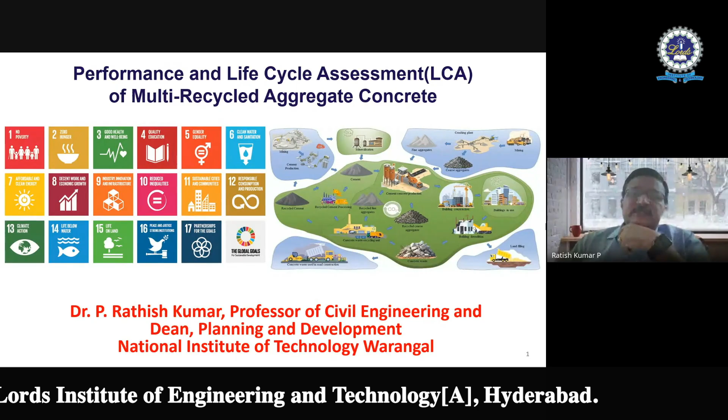And you can see that there are several keywords which I'm trying to mention over there. One is performance, which is very, very important, as everybody knows. When I say performance, obviously, I'm talking about strength as well as durability, right? And then I'm using another keyword, which is life cycle assessment, which is the process which goes into making a product, and the amount of energy which is required is also a part of it. That's like embodied energy. So in this process, what are the different stages which are involved in this life cycle assessment? I'm also going to touch upon that.

And contrary to the point that everybody talks about recycled aggregate concrete, we try to go a little bit in a slightly different way, that we try to go for multi-recycled aggregate concrete. I mean, we thought of exploring the idea of not just single recycled, but is it possible to go for generations of recycling also?

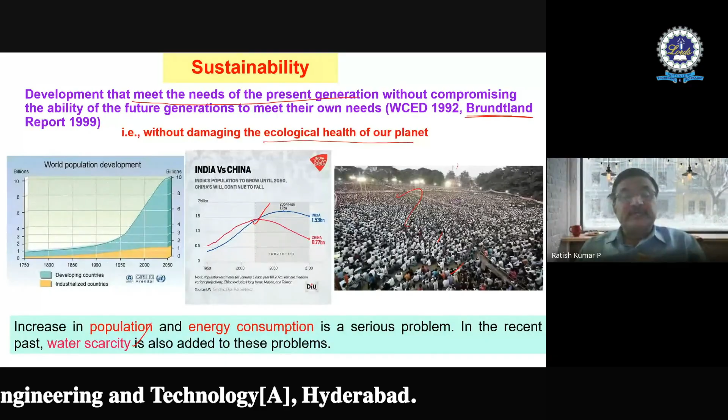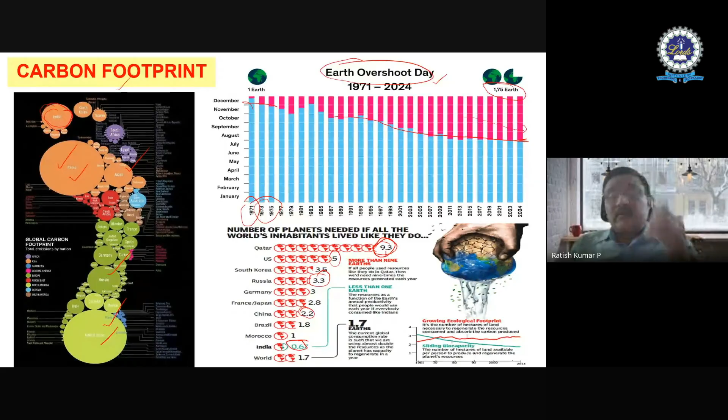But at the same time, we cannot be complacent, because as the population is increasing and we have crossed China now, our demand for infrastructure is increasing, our need for resources is increasing. So that is the reason why we cannot be complacent about saying that we are 0.67 times of Earth. All of this I'm talking in terms of the global ecological footprint.

Now, if you try to understand the energy side, India's projected demand, that's why all of us are talking in terms of sustainability - that is the background we have to really understand. If you try to see India's projected demand by 2047, we are talking in terms of Viksit Bharat. We have a vision for 2047, and all of us in different directions, whether engineers or teachers or working in different areas, we are aiming in that direction.

We are trying to come in tune with the Viksit Bharat concept of India. Now, if you try to see the global energy demand, or India's projected demand by 2047, India's projected demand is close to around 18,125 terawatt hours. I might not be interested much in industry, which is 9,920, but I'm interested more in buildings, which is 2,287 terawatt hours. That is our projected demand by 2047, right?

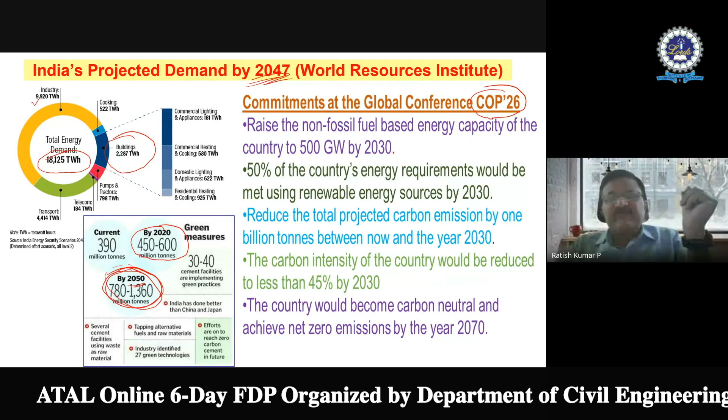Now, our Prime Minister Modi ji has actually made 5 tall promises at COP26, the Conference of Parties, which was conducted in Glasgow, Scotland, where we have made a responsibility on each of us, which we call Panchamrit. So there are 5 promises which we have made to the world that we are going to realize.

One of the important things is, we are actually dependent upon fossil fuels. So we want to raise the non-fossil fuel based energy capacity. That's one very important thing, which I'm also going to cover a little bit in the idea of life cycle assessment - what are the different fossil fuels we are trying to use and can we really reduce them. We want to raise the non-fossil fuel based energy to 500 gigawatts by 2030. That's a tall challenge.

The other thing is we want to basically reduce the country's energy requirements through renewable energy resources - solar energy, hydel power, wind energy, whatever it is. So we want to improve ourselves by 50% by the end of 2030. And then we want to basically reduce the total carbon emission by 1 billion tons, probably between 2024 and 2030. We want to reduce the total projected carbon emissions by 1 billion ton.

When I said carbon emissions are to be decreased, obviously we have to think about reduction in carbon dioxide from cement also, because it is normally said that 1 ton of cement produces around 0.89 or 0.9 tons of CO2. So some people say 1 ton and 1 ton of CO2, but it's around 0.89, 0.9 tons basically. We want to reduce that, and we have to think about ways and means of doing that. The next thing is, the fourth promise we have made is we want to reduce the carbon intensity by 45% by 2030.

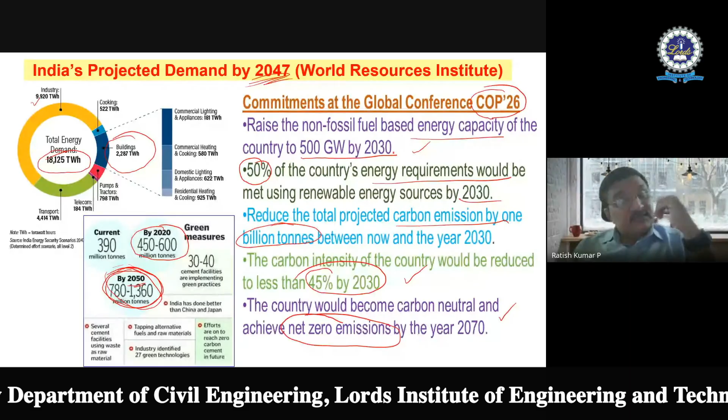That's another challenge, and then finally we are trying to make the fifth promise: that our country is going to become net zero emission by 2070. This we can achieve only when each of your individual campuses or spaces contribute to that. So that's a very important thing. These are the 1, 2, 3, 4, 5 promises which we have made from our country to the world, and obviously that responsibility we have to shoulder. These 5 promises are called Panchamrit, made at COP 26, the Conference of Parties 26 meeting, a global meeting which took place in Glasgow in Scotland. So that's what the challenge is now. All of us are equally responsible to achieve these 5 points. It's not just that the Prime Minister has made a promise and we forget about it - all of us have this responsibility.

Now let me try to slowly enter into the concrete part and then go into the performance part, etc. I will not go too deep because I also will touch upon the multi-recycled aggregate part.

If we try to see, at one point in time when you think about heritage structures, for example, we were part of the Ramappa World Heritage Site project. We did a lot of work collecting material from the Ramappa site where the bricks in the Sanctum Sanctorum area were broken, and the mortar used for connecting the bricks - we tried to collect that mortar. We did a lot of sampling, and we could crack the recipe for this 815-year-old temple, using different types of organic additives and several other things they were using, along with lime, which is a well-established technique.

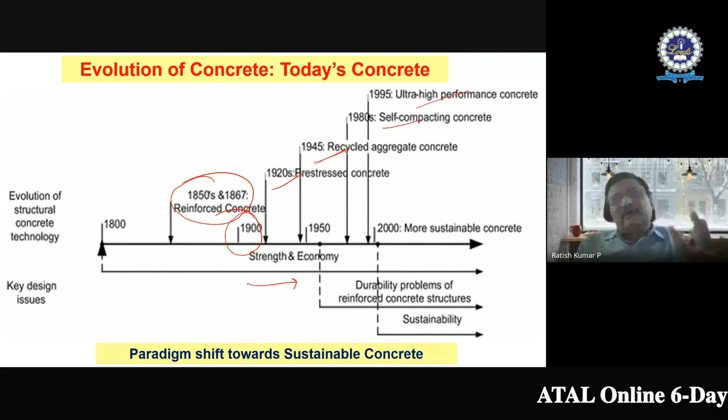If you go down the timeline, you can see that in the 1920s came prestressed concrete, recycled aggregate came in 1945, then self-compacting concrete, ultra high performance concrete. These days we are talking about roller compacted concrete, fibrous concretes - all these developments have started only in recent years.

People started thinking that at one point the concept was that durability is normally achieved through strength. But then we realized it's not the question of achieving durability through strength - it's basically a performance-based design, not a prescriptive type of design. We thought strength is achieved through durability, not durability through strength. And then slowly we have been moving in the direction of sustainability.

We have been thinking about three important points: strength, durability, and then we entered into another domain called sustainability. That's the reason why we are now talking in terms of sustainable transportation, sustainable water resources, sustainability in terms of environment, in terms of technology, in terms of social aspect, in terms of economical aspect. So when you talk in terms of sustainability, there are four important things.

One is called the social aspect, environmental aspect, economical aspect, and the fourth one is technology. In fact, technology was basically looked at in the environmental aspect. Now we try to make it a quadruple bottom line approach instead of a triple bottom line approach. And we have been slowly moving towards sustainability, and that's the reason why all of us, whether it is FDPs or research, have been talking in terms of sustainable concrete, sustainable mortars, etc.

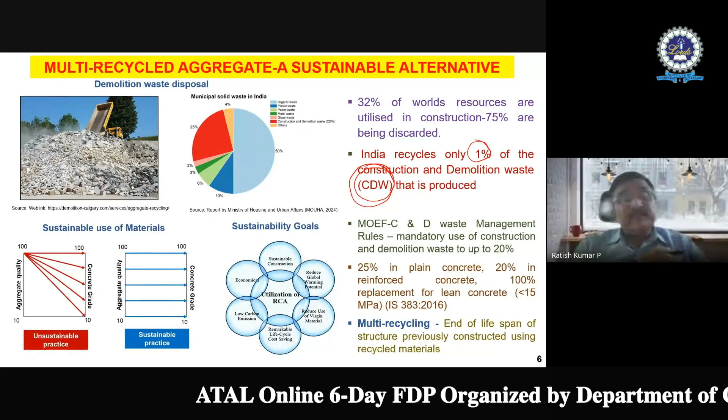And one of the important replacements is construction demolition waste. People have been doing that, but unfortunately there should be a lot of pickup in this direction, because India is recycling only 1% of construction demolition waste. There is the Ministry of Environment and Forest as well as the C&D rules, which very clearly say that we have to mandatorily replace demolition waste up to 20% in any construction. But the problem is only with implementation. At one point of time, we had been working a lot in the direction of fly ash.

And if you try to compare, people who are doing research in the area for a decade or a decade and a half or so, when we were trying to do the work on fly ash and other supplementary cementitious materials, you'd try to compare the cost of PPC as well as OPC, for example, right? Now, these days we are talking about Portland Pozzolana cement. We're talking about Portland slag cement. We're in fact also talking about the replacement.

Like, why should we go for only cement-grade limestone? Why can't we go for medium-grade limestone? And then we are talking about limestone-based cement, and we are trying to use different types of cements like Portland slag cement, etc. At one point of time, if people remember, if you compared the cost difference between ordinary Portland cement and Portland slag cement, the Portland slag cement was less. Nowadays, we are not really finding ordinary Portland cement at all, which means, yeah.

Somebody wants to talk? Okay. So, am I audible, please? Can I just get a reply from your side that I'm audible? Yes, sir, you are audible, sir. Go ahead. No, I thought somebody was asking a question. Okay, right. So I'm perfectly audible.

Okay. So, this was the situation at one point of time. But slowly, now we have realized that Portland Pozzolana cement, Portland slag cement, limestone-based cement, we have been doing a lot of research in that particular direction. We, I mean, all of us, right? We have been doing a lot of research, and we accept that there are different types of admixtures in the form of supplementary cementitious materials, which we have been trying to mix left and right.

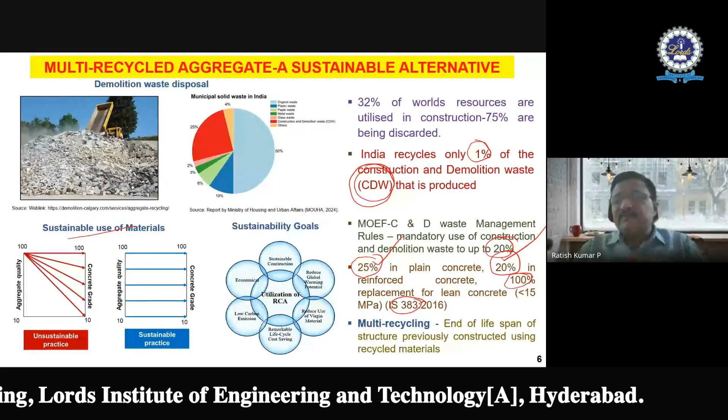As I told you, I'll put it broadly in terms of the social aspect, economical aspect, environmental aspect, and technological aspect. Technologically, when I'm replacing, I'm able to get a certain grade of concrete. Economically, I'm reducing the use of dwindling resources, so I'm not mining so much. And from an environmental point of view, when I'm not trying to excavate and explode the resources, I'm putting a check on the environmental aspect also.

And I'm also trying to concentrate on social acceptability, because social acceptability requires a good amount of research and dissemination. That is the idea I'm trying to take here. Now, we did some research in the laboratory. But it's not only at laboratory scale. We went to a slightly higher level, an industry scale, where we produced precast blocks, for example paver blocks. We have also tried to develop them using third generation recycled aggregate.

Please remember, all of you researchers and teachers, our research should never be restricted to the laboratory. And don't think that something added, a paper came out, and these days we do microstructure characterization, etc., develop a good paper, publish it, gone. That's not the point. The point is, now we are trying to go from publishing to patenting to industry scale. Is whatever I do in the laboratory going to industry or not? Otherwise, our research is going to waste. This is my feeling.

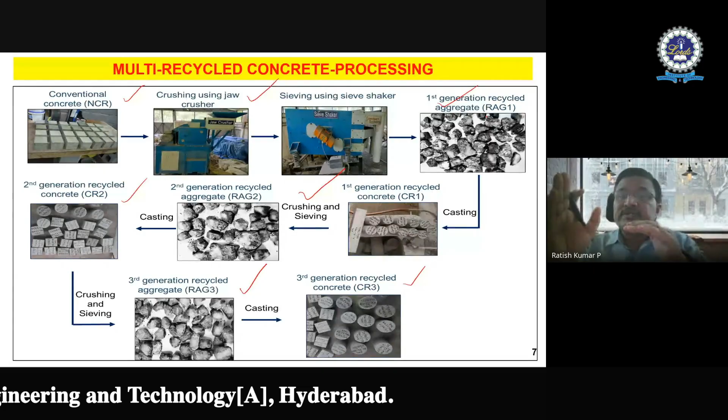Of course, research in this direction requires a good amount of basic studies in the laboratory. In our laboratory, we take a conventional concrete, crush it in the jaw crusher, get first generation recycled aggregate, make a second generation, crush it once again, make a third generation recycled aggregate, and then develop recycled aggregate concrete. We study strength and durability, and we understand that crushing expends a good amount of energy. So the energy versus the economy, and the energy versus the carbon footprint decrease, should be calibrated. That's what we did for 3 generations of recycling.

Now I just want to put one point here. Because of the paucity of time, I cannot go deeper. But since aggregate occupies a bigger role, 60-70% being aggregate, you can definitely reduce the paste content. If I can pack these aggregates in such a way that the paste content reduces, then the cement content also decreases. So when concentrating more on the aggregate part, I would like to bring to your notice that there is something called particle packing theory.

In fact, there are different methods out there. We have monodisperse systems, polydisperse systems. We have a discrete approach where we try to go for binary, ternary models, etc. We have a continuous approach where we have different methods like modified Andreasen, Fuller and Thompson, etc. These are the methods which are there.

Some of the basic concepts, I think people who are really interested in research can also work in the direction of using the modified Toufar model, the Dewar model, and the compressible packing model. So these are the three models which are very popular as far as the discrete approach is concerned. And the modified Andreasen model is a popular approach as far as the continuous approach is concerned. I'm not really going deeper into this.

People can refer. And if in case you have any doubts, you can just put particle packing theories and Ratish Kumar, you can get some papers you can go through. And you can also ping in any doubts, if there are, you can try to do that.

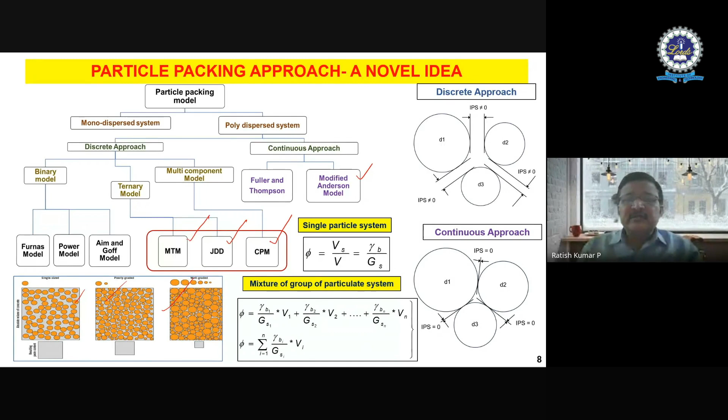Because of the paucity of time, I can't go deep into that, but I can only say that there are three methods which are very popular: the modified Toufar model, the Dewar model, and the compressible packing model, which was originally proposed by de Larrard. So the concept is basically maximizing the density of the particles, reducing the paste content, right?

Now, just to give you some idea, this is the loosening effect. These are the wall effects, where the bigger particles are fitting into the smaller particles, or the smaller particles are fitting into the bigger particles. We get a wall effect as well as a loosening effect.

And when you try to fill it up, this is what I'm trying to say here: if I compare a standard method versus a particle packing method, if you notice my red ticks on the left and right side, the volume filled with aggregate is slightly increasing. And then I'm leaving a lesser amount of paste. Additional paste is there. And you can see the volume of voids is decreasing.

So that means I'm packing in such a way that more aggregate particles are there, while satisfying the minimum cement content, of course. In fact, I can try to reduce the total cement content per se, but I can definitely get a very good packing also at the same time.

Meaning that with the same cement content as what is recommended, I can get a higher grade of concrete or higher strength in the concrete. That's what it means.

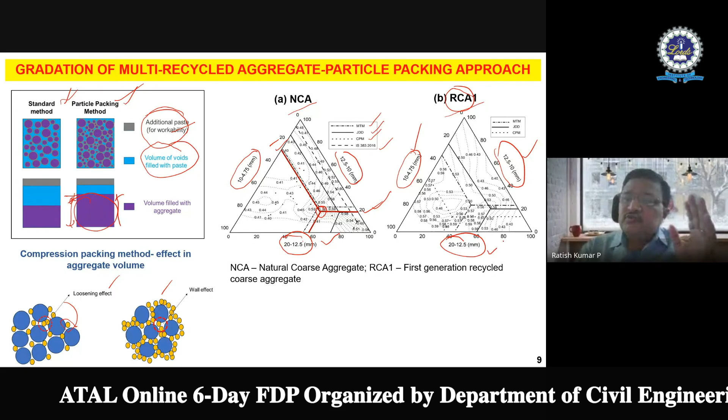As you can notice, I'm trying to show that in case of recycled aggregate also, the same approach is adopted, and then you do the gradation based upon the different sizes of the aggregates, and you try to arrive at what percentage passing 10 to 4.75, passing 12.5 and passing 20 to 12.5 can be taken, as an example. You can take each of these different percentages to get a packing in such a way that there is very little room for voids. That is what is called the concept of the particle packing approach.

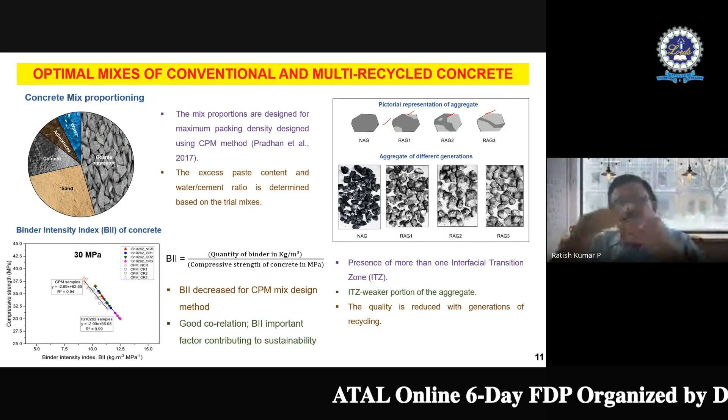Now, there is one disadvantage or one serious problem in case of recycled aggregate, and more so in case of multi-recycled aggregate, because as you can see, the paste content or the old mortar, which we call adhered mortar, is increasing as the generations of recycling increase. And obviously, when you do the jaw crushing, which I proposed earlier, the adhered mortar will be removed, and there are certain other methods also which I mentioned: thermomechanical treatment, mechanical treatment, simple soaking method, or acid treatment.

These are some of the methods which are actually there, so we can also try to do them. But of course, whatever method I use, I definitely have to show that it is economical and not energy consuming. So we have to think about that. So everything we have to, in fact, try to compare.

I have also come across this - once I try to pack properly, I try to estimate the binder intensity index, calculated as the quantity of binder versus the compressive strength. You notice that as the binder intensity index increases, there's a drop in compressive strength, depending on the method I follow. So the advantage I get with the packing theories versus the IS 10262 part is concerned, right?

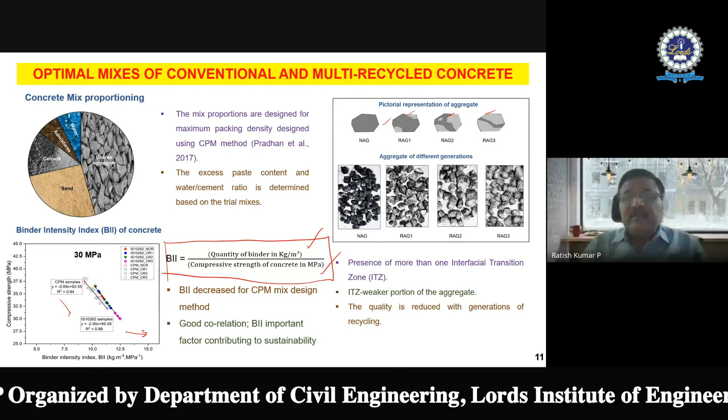There are two important things I'm definitely aware of. First, water absorption is definitely going to be more in recycled aggregates, and there are different methods to address that - we can either compensate for that water absorption, or soak it in water until it reaches a saturated surface dry condition before making the concrete. The interfacial transition zone between the aggregate and the paste phase is a weak phase, and this gets worse as you get multiple interfacial transition zones going towards different generations of recycled aggregate. We're aware of that, so we try to go for a subtle level of crushing so that much embodied energy is not wasted. All that is taken into account.

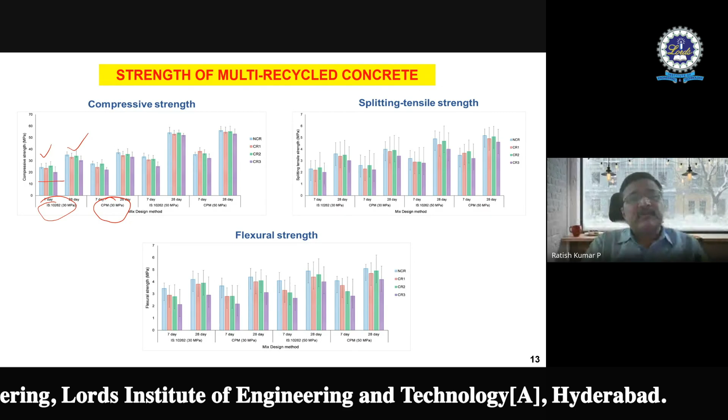Now let me give some figures regarding compressive strength, split tensile strength, and flexural strength. I'm showing the 7-day and 28-day strength - this is from the IS code method, this is the CPM method. When comparing different grades of concrete across the 3 figures, the light blue, orange, green, and violet correspond to conventional concrete, first generation, second generation, and third generation respectively.

We could get a good benefit in terms of the CPM model, because there's an increase in strength, meaning with a lesser amount of cement I can still get the targeted compressive strength, which is definitely something good. I got the same result for 50 MPa concrete as for 30 MPa concrete, and the same with respect to split tensile strength and flexural strength. That means by modifying the inferior type of aggregate, even second or third generation, I can get a benefit provided I'm using the right particle packing approach. That's the point I want to make here.

Now, going to when I say performance, there is another thing called durability. When I say durability, what we did is we took 4 different chemical species: HCl, H2SO4, NaCl, and magnesium sulfate. That means sulfate attack, chloride attack, and acid attack are all considered.

When subjecting the specimens to these different species, I calculate 4 different parameters. First is the acid attacking factor, where I soak the specimens in HCl, H2SO4, NaCl, MgSO4 and measure the change in dimensional stability of the structure, called the acid attacking factor. Then there is a loss of mass that takes place, which I call the acid mass loss factor.

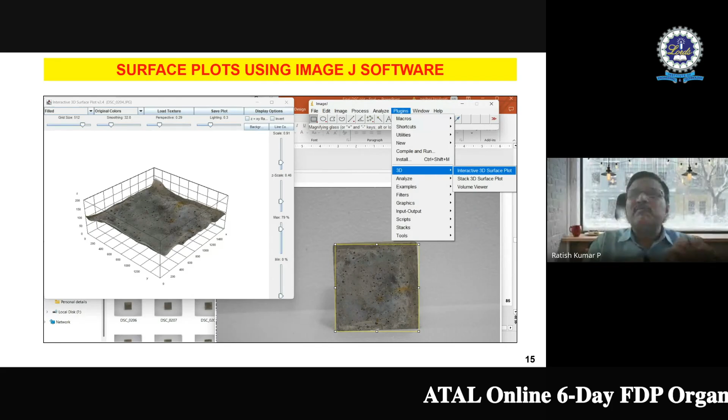Then I can determine that this sample is subject to a good amount of loss, and probably this could be because of this particular reason. I made a good number of samples in the laboratory - hundreds of samples - and stored them as a database. This is a non-contact method of understanding the change in color or color stability of the element when subjected to different types of chemical species.

We use a method called ImageJ software, and capture the images before and after subjecting the specimens to these chemical species at the end of different curing periods. Then we determine the different changes that take place in terms of surface texture and color change.

We classify these changes as follows: if it's HCl, you see an orange shade. H2SO4, you see a white precipitate. NaCl, white precipitate, which could also be accompanied by a certain amount of efflorescence. And MgSO4 shows white and dark gray patches.

So when I'm trying to record these values for hundreds of specimens, I have a database, which means I just try to use what is basically required, only something like a DSLR camera. I want something like a color checker, and I require a certain amount of luminescence to be maintained, and a certain amount of temperature to be maintained.

I keep on taking images of these pictures at different levels of curing. Curing in the sense, after curing, subjected to different types of chemical species, as I'm trying to show there. Then I can understand the surface porosity, and understand the changes in color because of the attack. I can understand that if it's subjected to a strong acid attack, the entire surface gets peeled off, and only the aggregates project.

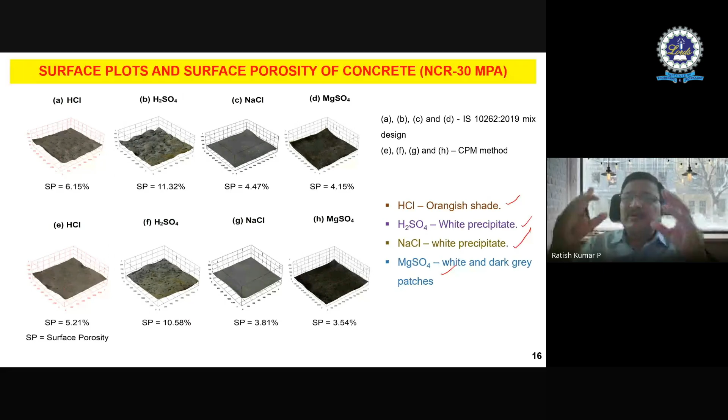And it's not just simple data. We have made hundreds of specimens and recorded data, so that when I go to the site, this can serve as a precursor. I don't say this is the only thing which decides what type of attack it's subject to, but it can definitely serve as a precursor for a quick reconnaissance inspection. I can take a photograph of the structure, compare that color, and come to some conclusion so I can go for further investigation in that direction. That's the point here.

So here you can see I'm putting a color checker, taking the specimen, and using a lux meter to maintain a certain amount of luminescence, around 110, 120. Then I use a high resolution DSLR camera. I take the images, compare with the color checker to determine the color.

I subject it to different specimens, chemical species, and different generations, and I get different parameters here. The parameters could be simple RGB, or something like LAB, or XYZ, or hue, saturation, and intensity.

In fact, hue, saturation, intensity is very close to the human eye, which can sometimes find it difficult to recognize different colors, but HSI is better from that point of view. LAB is actually better where you want to compare the curing methods.

So there are different methods in the ImageJ software. We pick up some of them and make a good amount of images, and that data is there for me to use to compare on the field. This is again to show an RGB data which I'm basically collecting.

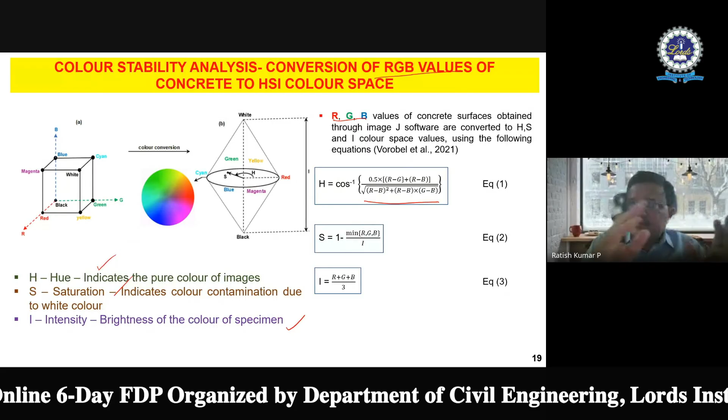Basically I'm trying to compare with the color checker, and then I have some values, and using the ImageJ software I can get these RGB values exactly, and then I can calculate the HSI values, and I can try to compare these HSI values when it is not subjected to any chemical attack versus the chemical attack. So that's what we try to do here, and you can see that for different types of grades.

Here I'm trying to show a 30 MPa concrete as well as 50 MPa concrete, and for this 30 MPa concrete I've tried to restrict now to only design using IS method as well as the CPM method, and I could get the corresponding chemical exposure to HCl, H2SO4, NaCl as well as MgSO4, because these are some of the important ones. You can ask me why are you going for these things? The chloride attack as well as carbonation, for example, are very serious as far as the corrosion is concerned. And as you know, more than 40% of the structures get damaged because of the chloride attack.

And sulfate attack, it can be intrinsic, it can be extrinsic also. Please remember, it is intrinsic when you try to make a concrete which is already having a good amount of chloride content, which is more than the acceptable value. It could be extrinsic, where your structure is in the proximity of a chloride environment. Similarly, for the sulfate attack, normally we say inert aggregates, but a couple of times we do encounter reactive type of aggregates, or the soil on which your structure is existing could also be leading to a sulfate attack on the structure. And there could be an acid attack, which is very, very dangerous.

The passive layer which is there on the steel basically gets removed because of this acid attack. And obviously, it creates a path for the other chemicals also to enter inside. And so it becomes a cascading effect. For example, if the carbonation is more, then obviously the alkalinity of the concrete is going to come down. And then, because of the acidic atmosphere, the passive layer which is normally there on the steel gets removed, and the attack from other chemicals is also going to take place. That's the reason why the chemical species which we have selected are those which can really cause a serious effect on concrete, right?

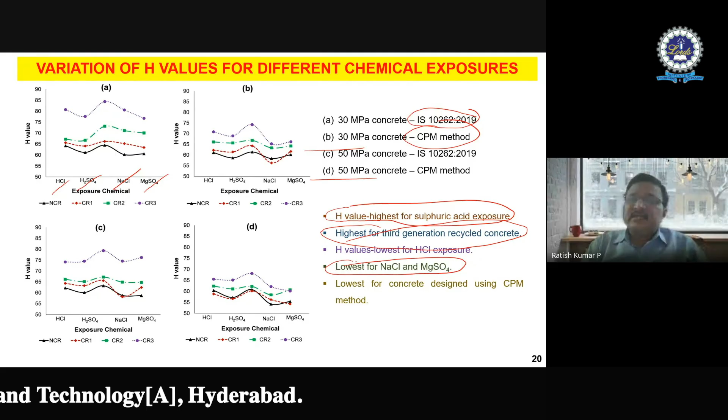And we can see some very good data. You can see the H value is the highest for the sulfuric acid exposure, and it is the highest for the third generation recycled aggregate, and it's the lowest for NaCl as well as MgSO4. And it's the lowest for concrete designed using the CPM method, which obviously means that the mixes designed using the compressible packing model are more dense, and they could result in a lesser amount of external attack, right? And similarly, if you see the saturation also, it is the same, highest in case of HCl, and lowest in case of NaCl as well as MgSO4, right?

And when you also see the intensity, it's definitely the highest in case of HCl as well as H2SO4. A reddish gray precipitate is actually forming, and the intensity is obviously going to be more because it is subjected to an acid attack. And these values are also a little more as compared to the HS in case of NaCl as well as MgSO4. And it is the highest, obviously, in case of third generation, right? And definitely, as you can notice from the figures here, the samples which are designed using the CPM method are performing much better when compared to the samples done using the IS code method, right?

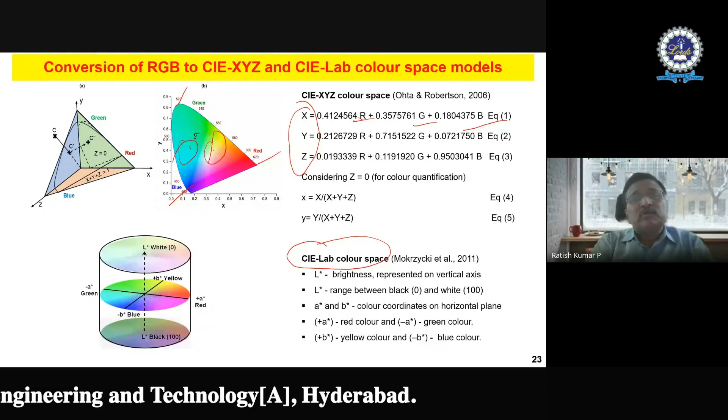Now, once the RGB are calculated, the XYZ value, this is again a different color space where we can quantify, right? And CIELAB is another color space. There are 4 color spaces which we try to explore: one is RGB, the other is XYZ, the other is CIELAB, and the other is HSI. If you are going a little deeper into the image analysis using the ImageJ software, you can get a good idea, and you can see the vertices are red, blue, green, and when they get contaminated they are going to be different colors, and whether you're moving close to green or red or orange is compared with the original specimen, your original beam or girder on the site, versus the data which you are trying to preserve in your laboratory.

That's a standard database. You try to compare and then say that this is less, this is more, which means obviously this is exposed to this type of atmosphere, right? That is basically the concept of image analysis. And then obviously the last thing is basically the LAB, which is best in case where you are trying to go for different types of curing, right?

Coming to the last aspect, that is the third aspect, which we call the life cycle impact. I talked about sustainability in terms of performance, that is your durability as well as your strength initially. And when I say durability, I was talking in terms of mechanical durability. And then I slowly went into the image analysis, where I said that this is one best way, one easy way, where you can get a good amount of guess about

the exposure to which this particular structure has been subjected, whether it is acid attack or chloride attack or sulfate attack, or what sort of exposure. It could give me a basic idea from where I can go a little bit further, explore a little deeper, and then use some other non-destructive techniques, because this is what is called a non-invasive technique, where we are not really touching the sample on the site. We are taking the images and comparing them with the ones which are there in the laboratory.

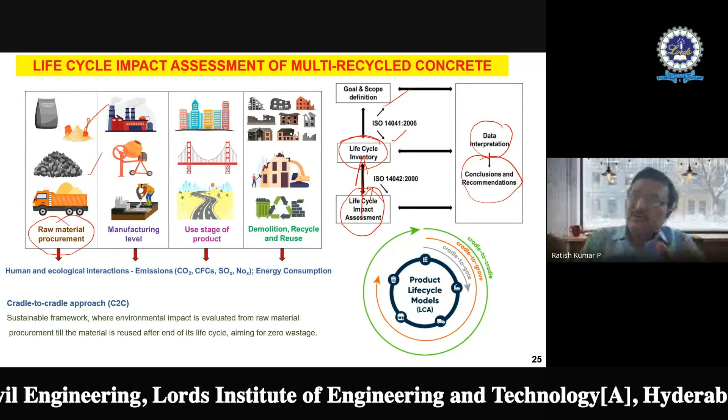That's what is called boundary conditions. In fact, when I'm trying to develop the product, there are life cycle models, and there are different types of boundary conditions. The popular three boundary conditions are cradle to cradle, cradle to gate, or cradle to grave, right? And then we also have other types of boundary conditions, cradle to end of gate, or cradle to grave, like this. So different types of boundary conditions are there.

But in case you are going for recycled, you are coming from this source and then you are again going back. So it is something like cradle to, once again, cradle. That means you are taking a whole circle here in case of recycling of the aggregates. So you are having this level, and then you are trying to manufacture the concrete. When you manufacture the concrete, obviously there is going to be mixing, transporting, placing, and curing. All these things are there.

And then after that, you are going to use the product. You're developing a product in the form of bridges or buildings or anything like that. You use it for some time, then you're crushing it and demolishing. And then you are developing the aggregate once again, and that aggregate you use as a raw material once again here. So that's the full life cycle when you go for cradle to cradle, right? This is one of the boundary conditions which we work out, and which is true in case of multi-recycled aggregate concrete.

So this is basically trying to use the material again and again, which means I'm really not expending the rare earth resources. That means I'm indirectly trying to reduce the carbon footprint. Indirectly, I'm trying to concentrate more towards the entire life cycle, etc. Which means I'm also trying to concentrate on how to make the resources more useful beyond this. That's a very simple way to tell it, right?

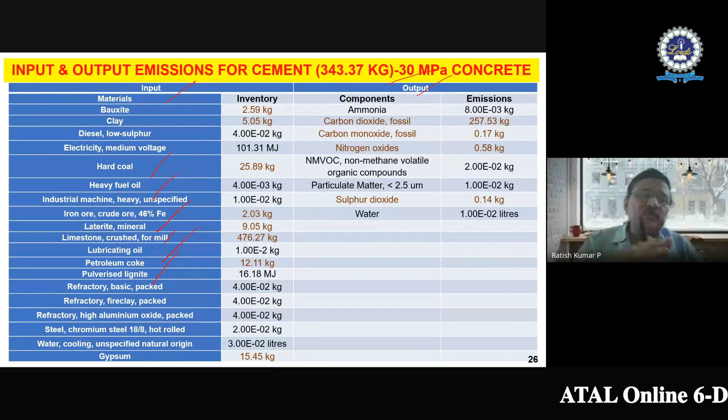And then this is the corresponding inventory we calculate. These are the different components, and these are the emissions. I'm not going to talk about the numbers like 12.11, 16.18, something like that, but please go through this. These are the different materials which are going as an input for making the cement. I'm talking about cement here. This is the inventory which we have calculated for each of the materials.

Remember that this is not an easy task to calculate, because we try to collect this data from the different cement manufacturing industries from the south side, north side, east side, west side, and middle part of the country where the cement is being produced. And then we came to a conclusion about the inventory, depending upon where.

In fact, I'm only showing one such inventory, but we try to do the inventory for different materials, because somebody is producing a multi-recycled aggregate in south or north or west, for example. I should be in a position to calculate that inventory according to the particular cement which is available locally, because it is not expected that you transport the cement from one end of the country to the other end, because that's going to expend a huge amount of resources in terms of transport or diesel. So that is one thing.

So these are the corresponding emissions. I have done a similar exercise in case of fine aggregate also, as you can notice here. And then this is the inventory. These are the components. In case of sand, what we have is diesel burnt in the building machine, right? And then we have electricity, which is going to be there for making the sand. So that is the total amount of emissions, which are calculated like this.

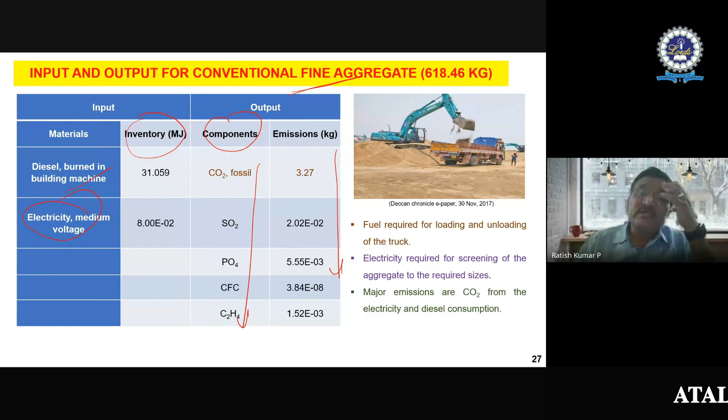And as everybody knows, the important thing in this particular case is the transportation, which is definitely going to consume a good amount of diesel. And obviously, to crush, you also require electricity. So that is the reason why electricity and diesel consumption are the major emissions. Obviously, they are going to emit carbon dioxide. So they are the major emissions as far as sand is concerned.

Similarly, in case of coarse aggregate, coarse aggregate also needs crushing of the boulder. So you also need to explode; in that particular case, blasting is required. So whatever are the different types of inventory required for that, say diesel, electricity, explosives, oil, etc., everything is calculated in this case also. What I'm trying to show here is an M30 grade concrete concept only. And I'm also considering the different emissions, and I'm very clear about the SOx and NOx and the CO2 which is generated out of this process of developing the coarse aggregate.

Then what I did is I tried to combine all of them. I tried to calculate the total amount of carbon dioxide emissions. I also tried to calculate the embodied energy. Embodied energy, I again remind you, is the amount of energy which is required to develop a certain product, right? And so I take the cement here, fine aggregate here, coarse aggregate here, and I'll be requiring chemical admixture also, which is important, right?

Now, these days, when I'm trying to reduce the water cement ratio, I can't really pump, I can't really carry the concrete by tremie pipes, etc. So obviously the chemical admixture is required. Your concrete mixer operation is there. Your transportation part is there, concrete transportation, right? And you also have the water, of course, a little bit, involved in that, which is also contributing a little bit to the emission in the process.

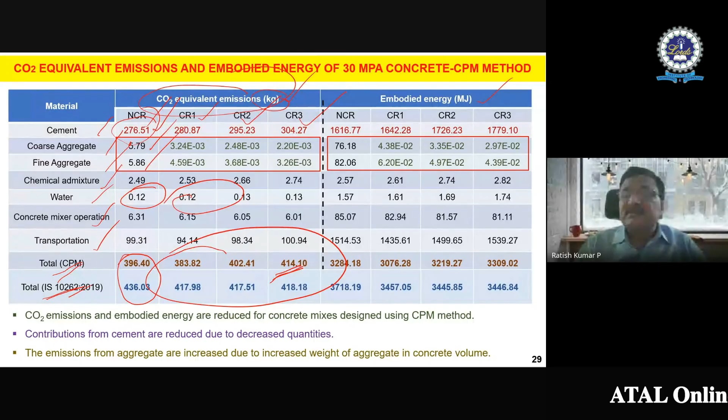The same is the case in terms of embodied energy also. As you can notice, for the conventional concrete, first generation, second generation, third generation, these values as compared to your IS method of design, when I go for particle packing theory, the amount of energy which is expended to develop the same product, which is 30 MPa concrete, is definitely less.

That means the contributions in terms of carbon dioxide are reducing. And mind you, I'm just talking about a certain level of cement, a certain level of fine aggregate and coarse aggregate. If I try to scale it to an industry scale, try to imagine how much benefit I'm going to get if I simply modify the gradation of the aggregate by using the particle packing theory concept.

In the process of this life cycle impact assessment, we calculate the different parameters to justify. That is the ADP, for example, the abiotic depletion potential, which is important. We have the global warming potential, which is also important. The ozone depletion potential is important, and the acidification potential is important. Of course, the other things are also important, but they are of a smaller scale. As far as the impact assessment is concerned, these are the 7 criteria which are used to judge how effective the method is.

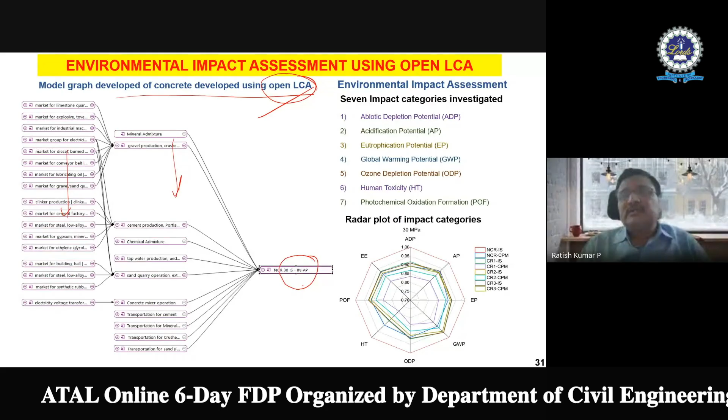You can see here that this is the model graph using the OpenLCA software. We can do it with SimaPro also, but the OpenLCA software is what I'm presenting here. You can see that this part is the input part. This is the admixture and everything. And one of the things I'm trying to show you is the abiotic potential here. Likewise, you can notice the acidification potential and the abiotic potential on the different sides of the curve over there.

You can notice here that the red one you're seeing outside is the conventional concrete, and as you go towards the inside, if I design the same thing using CPM, it's inside compared to the outside one. And when I go towards CR1, that is first generation, CR2, second generation, and CR3, third generation, when I see this radar plot, it's very clear that all the criteria I'm comparing are decreasing compared to the conventional concrete, which is on the outer side.

I hope you are appreciating this, that on the outside we traditionally have the conventional concrete, and on the inside we have the same thing designed using the CPM model. But inside that, you should notice that when I go for recycling, I'm getting a benefit in terms of all these parameters, and they are inside the radar plot. You can see these areas, whereas the conventional concrete is over there, which means I'm definitely getting a good amount of benefit from the impact assessment point of view.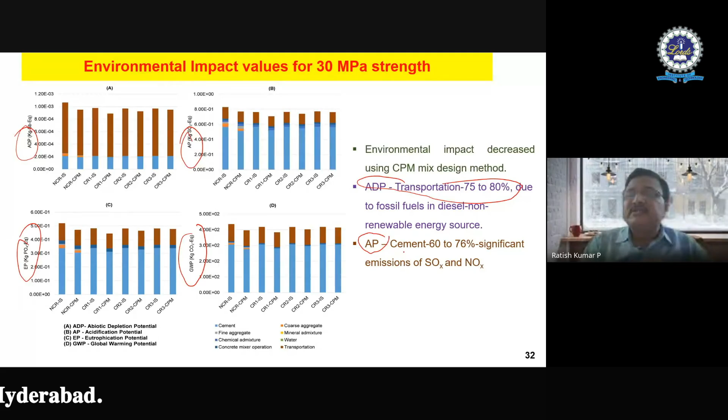These are the impact values. If you are interested, you can notice the abiotic depletion potential, the acidification potential, the eutrophication potential, and the global warming potential, which are important. I compare them in these graphs in terms of the amount of decrease, and you can see that the ADP is decreasing by 75-80%, in fact. As far as the acidification potential is concerned, in the case of cement, you can notice a significant decrease.

The same is the case for transportation as well, as you can notice. As for the other criteria, it's not just the four; there are seven different types I'm comparing, where I'm also taking human toxicity, ozone depletion potential, and photochemical oxidation. So these are the three other things I'm making a comparison of over there.

This is the contribution percentage as far as the materials are concerned. When you come to the cement part, you can see that with respect to the global warming potential, it's obviously going to play a bigger role, but I can definitely decrease it if I decrease the total amount of cement content.

So the contribution of cement is definitely going to come down in terms of all these different types of potential materials. And that is true in case of both the first generation concrete as well as normal concrete. Definitely, I'm getting that advantage.

In terms of ADP also, I can see in terms of all the materials there is definitely a drop in the value. And in terms of acidification potential also, I could see there is a drop in the value, which means that across all 7 different criteria I'm trying to talk about, there is definitely a good amount of benefit.

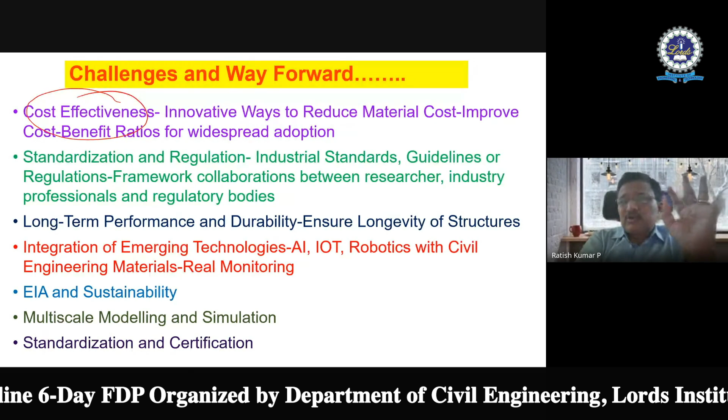One of the things is, you are trying to basically talk more in terms of developing the material, but as I said, four things are important: social aspect, social acceptability, economical viability, environmental feasibility, and technological plausibility. Whoever is working on different types of materials, please try to think about these four aspects, which we normally call the quadruple bottom line approach as far as sustainability is concerned. Number one.

Number two is standardization and regulation. This is very important, that our research should not go and die at the laboratory level. It should go to a standardization level, where we think about formulating regulations so that people can definitely use it. There's no point working so much and then people stop using it. Implementability is possible only when professionals or regulatory bodies bring this research into a standard. So that's very important, and we have to work in that direction.

The other thing is long-term performance and durability. There are different types of materials which, in terms of short-term gains, show good strength and durability, but there are still a lot of doubts, as I told, in terms of geopolymer, where efflorescence, corrosion, etc. are still a problem. It's very important because it's a very young material, in the sense that though it was done in the 1970s, these days we are trying to replace with fly ash and GGBS, and also go for other materials for geopolymerization—we have one-part and two-part geopolymers. A lot of research is still going on, but it's very important to think along the lines of durability, to ensure the longevity of the structure.

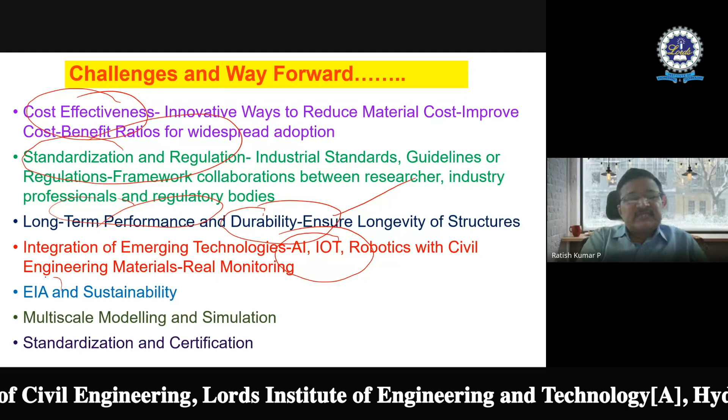The next thing is environmental impact assessment, which is something like what I'm trying to talk about in terms of inventory as well as sustainability. The other thing is, these days we are talking a lot about material characterization, so we can also go for micromechanical studies, etc. That's another area people can go into, combining experimental characterization with micromechanical characterization. And then the other thing is standardization and certification. These are some of the things coming to my mind as an extension of what can go into this direction of research.

I'm not really going into the supplementary cementitious materials part, etc., because many people might have talked about that. But I'm more concentrating on the big brother role which the aggregates are going to take care of, in the sense that it occupies a good amount of space in the concrete constituents.

So this is in general about my part on what I can contribute in the direction of performance, life cycle assessment, as well as the sustainability aspect, coming from the case of multi-recycled aggregate concrete. Thank you very much, and should you have any questions, please feel free to ask.

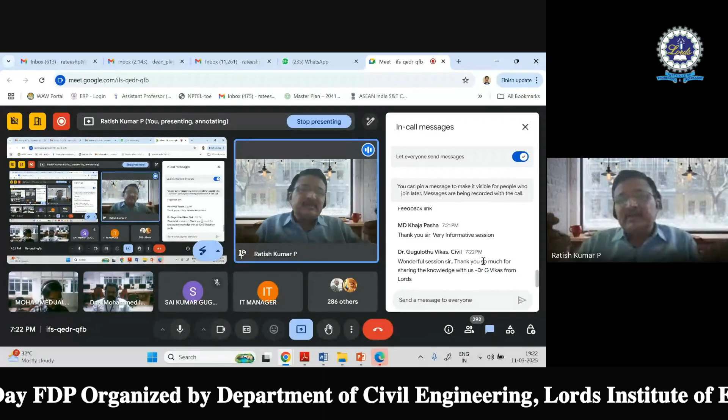Can you suggest about LC3 cement and can I use it? Yes, sure, as far as LC3 is concerned, I would appreciate if somebody can pick up clay from the local source, calcine it themselves, and then use it in LC3. That would be a good thing. Otherwise, LC3 which IIT Delhi have patented is being supplied. But it's very good if somebody can pick up local clay, calcine it, and check the benefits.

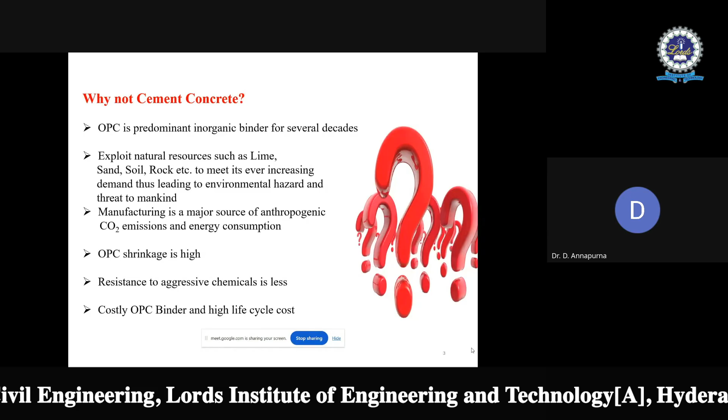Also, OPC shrinkage is very high, which is one drawback of ordinary Portland cement, and its resistance to aggressive chemicals is also less. The OPC binder is costly. And a very important aspect: in the last decade, we could see that the production of ordinary Portland cement is depleting, that is decreasing, because the usage of supplementary cementitious materials is more in construction. That is the reason for promoting silica-alumina rich materials like Portland pozzolana cement and Portland slag cement, which are most widely used.

One more important aspect: if we talk about Portland slag cement and Portland pozzolana cement, these materials are rich in silica and alumina, and at the same time have their own properties. But anyway, if you look at ordinary Portland cement, its usage is very wide, starting from very small constructions to large constructions. So there is a possibility, that means a need for replacement of ordinary Portland cement based concrete with an alternative material, that is alternative concrete.

There is a need for the production of no-cement concrete, also called geopolymer concrete. This geopolymer concrete was introduced by Professor Davidovits. It is prepared using an alkaline liquid to react with a source material of geological origin, or byproduct materials such as fly ash, etc.

Silica and alumina rich solids, when reacting with a high alkaline solution, give a geopolymer product. So silica and alumina rich solids will be pozzolanic materials in the form of fly ash, GGBS, metakaolin, etc., and high alkaline solution. Alkali materials like sodium based materials or potassium based materials can be used as an alkaline solution, or can be mixed to get the alkaline solution.

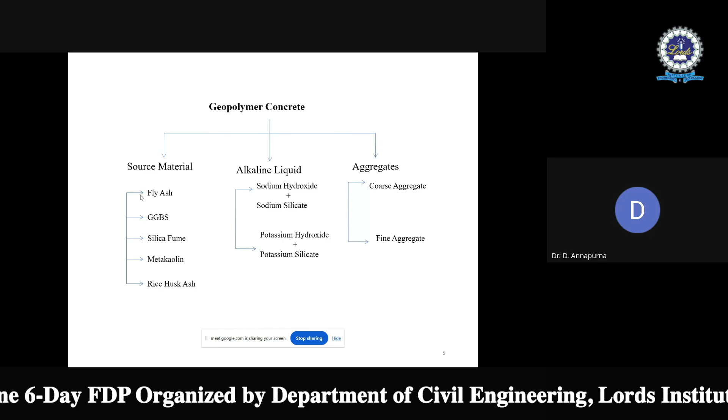Geopolymer concrete consists of three types of materials: first is source material, alkaline liquid, and aggregates. The source material should be rich in silica and alumina, for example fly ash, GGBS, silica fume, metakaolin, rice husk ash, etc. All these materials are rich in silica and alumina, so they can be considered as source material in the production of geopolymer concrete. In geopolymer concrete, the source material is also called a precursor. This precursor is then added with the alkaline liquid.

So to have a reaction, interreaction in the source material, some alkaline medium should be there. So that alkaline medium is created with the sodium based material or potassium based material, like sodium hydroxide, which is highly alkaline in nature, and it is added with the sodium silicate to get the alkaline liquid, or potassium based material like potassium hydroxide, potassium silicates are also added to get the alkaline liquid. So these materials, when added to the aggregates, geopolymer concrete will be prepared. So this is about the introduction of geopolymer concrete.

So here, because it is an alternative material to the conventional concrete, we need to understand the chemistry of geopolymer concrete. Like in ordinary Portland cement chemistry, OPC added with water is going to give calcium silicate hydrate gel, CH plus heat of hydration. Here also, how the geopolymer concrete will have a reaction. Geopolymer reactions are chemical reactions involved in the geopolymer concrete. Here we will try to look at geopolymerization.

Geopolymerization is a chemical process that transforms aluminosilicate materials into inorganic polymer structures under alkaline conditions. So these aluminosilicate materials like fly ash, GGBS, etc., will be converting into inorganic polymeric structures. And this transformation will occur only under alkaline conditions. For that reason, the alkaline activator is added.

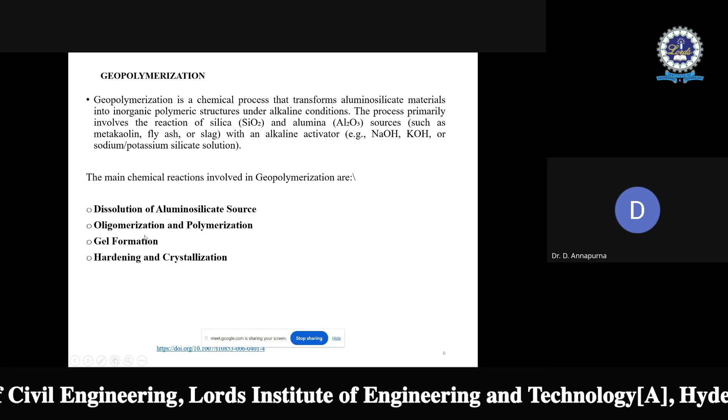So in the geopolymerization process chemical reaction, some stages will be involved. First stage will be the dissolution of aluminosilicate source. Second will be oligomerization and polymerization. Third will be gel formation. Fourth one will be hardening and crystallization. First, dissolution of aluminosilicate source.

Under these alkaline conditions, the aluminosilicate precursors, I said fly ash, GGBS, which are rich in alumina silicate, will be dissolving in the alkaline solution and releasing silicate and aluminate phases. So this is the aluminosilicate material, which is a precursor. Under this alkaline medium, it is going to dissolve and give two products, silicates and aluminates. Further, the silicate and aluminate will have an interreaction. So this occurs in the dissolution process.

After dissolution, oligomerization and polymerization occur. In the oligomerization process, the dissolved silica and alumina species form oligomeric species, which then react to form a three-dimensional aluminosilicate framework. If you look at the silica and alumina, when they are again reacting in the presence of this alkali solution, they will give a three-dimensional structure: silica, oxygen, aluminate, silica, oxygen, silicate. So this is oligomerization, that is three-dimensional structure formation.

These oligomers further polymerize, forming a rigid three-dimensional geopolymer network. Let us say this silica, oxygen, aluminate will again have a polymerization process and give a three-dimensional geopolymer network. So in this structural organization, the final structure of the geopolymer is composed of an amorphous to semi-crystalline network with repeating units like silica, oxygen, alumina, oxygen. So in terms of repeating structures, the final structure will be formed.

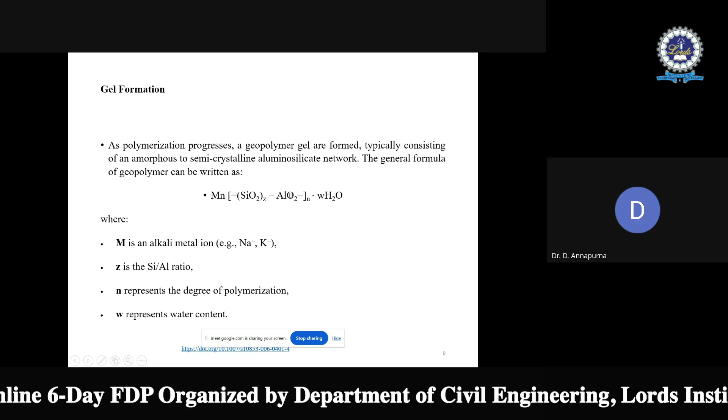Then the gel formation. After this polymerization, gel formation occurs. As polymerization progresses, a geopolymer gel is formed, typically consisting of an amorphous to semi-crystalline aluminosilicate network. The general formula of geopolymer, if you look at it, M stands for alkali metal ion, whether you use a sodium-based or potassium-based alkali activator. And n represents the degree of polymerization, how much polymerization has occurred.

And z stands for silica by alumina ratio, which plays a very important role in geopolymerization. If the silica by alumina ratio is between 1.5 and 2, then the geopolymer product will be produced. And w represents the water content in this particular geopolymer gel. The geopolymerization product will be represented like this. Then after gel formation, the gel will undergo hardening and crystallization. Over time, the geopolymer gel continues to harden, forming a strong, durable material. Some crystalline phase may form under specific conditions.

If you look at the simplified version of the geopolymer reaction, it can be expressed as alkali, aluminate, silicate reacting and giving the three-dimensional structure, which is oligomer, silica, oxygen, aluminate, and the gel phase, then the bound water. So for the overall reaction, take a typical sodium-based geopolymer reaction specified by earlier literature, using metakaolin as the source material. Metakaolin, that is alumina and silicate, reacting with sodium hydroxide and sodium silicate.

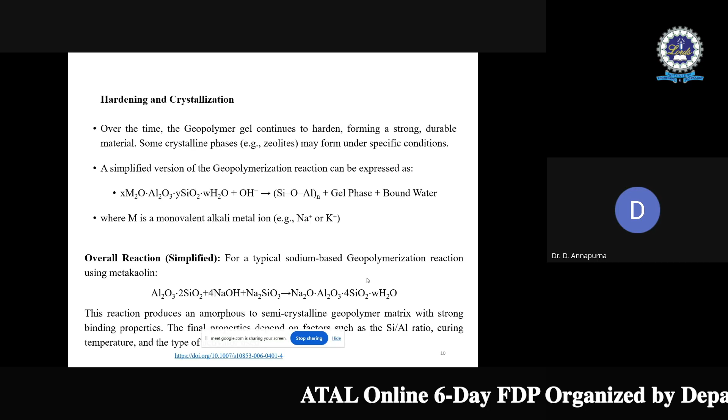First, all the precursors are going to be dissolved in the mix in the presence of this alkaline medium. Then the next stage will be oligomerization and polymerization. After that, gel will be formed and the gel will be hardened and it will form a crystalline product. If we take silica and alumina rich materials as the precursors, then the resulting product will be N-A-S-H gel. This is, in brief, the geopolymer reaction or geopolymerization process.

Then what are the different materials that can be used as precursors or source materials in the geopolymer concrete? So here I have given the list of sustainable materials which can be used as source materials or precursors. Starting from fly ash, then GGBS, then silica fume, then rice husk ash, sugarcane bagasse, then marble dust, red mud, metakaolin, limestone powder, alccofine, like that. I have given the list of all the possible materials.

Then how can we make use of these materials as precursors? Because to call it a precursor or source material, the material should be rich in silica and alumina. So let us check the chemical composition of precursors, starting from fly ash. Fly ash has silica content 50 to 60%, alumina will be 20 to 30%, then the calcium will be 5 to 10%. Then GGBS will be rich in calcium oxide, 40 to 50%, then the silica and alumina content.

Silica fume has a very high amount of silica content, mostly more than 90%. Rice husk ash will have more than 80% of silica oxide, and sugarcane bagasse ash has 60 to 70% of silica oxide and alumina and iron oxide. Rice husk ash and bagasse ash both are agri waste products. Nowadays, much research is being done in these areas to make use of supplementary cementitious materials in the preparation of concrete, so there is a scope to include them even in geopolymer concrete.

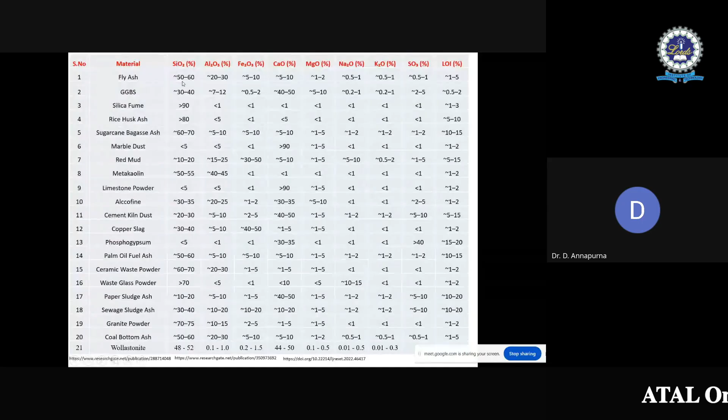Then paper sludge ash, it is also a rich source of calcium oxide. Then sewage sludge ash, this is rich in silica and alumina. It has a good content of silica and alumina. And the granite powder, then the coal bottom ash, it is also rich in silica and alumina. Then wollastonite has a rich amount of calcium oxide and also silica. So like that, all these materials are having silica, alumina, and calcium oxide. Some of the materials are rich in calcium oxide and some are rich in silica and alumina.

So there is a potentiality of using these materials or a combination of the materials to prepare geopolymer concrete. So one should understand the chemistry of geopolymer concrete to use alternative sustainable materials. Because if you look at how the research progressed, I said first it started with metakaolin, then it switched to fly ash. Now in India, most of the studies are done using fly ash and GGBS.

So GGBS again, the cost of GGBS is also high compared to other materials like marble dust. So those can be added as an admixture to the geopolymer concrete and we can prepare a more sustainable geopolymer concrete. So with that intention, I have shown all the possible materials along with the chemical compositions. So after looking at the geopolymerization process or chemistry of geopolymer concrete and the source materials, now we'll switch to how the source materials are produced. What is the source?

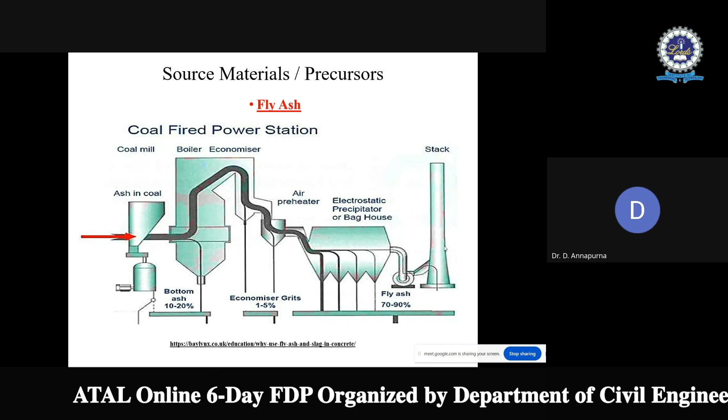Fly ash is actually produced from the combustion of coal in thermal power stations. From the thermal power stations we get two kinds of ashes: one is bottom ash, the other is fly ash. Bottom ash is coarser in size than fly ash and its reactivity will be less than fly ash. The fly ash is captured from the flue gases using an electrostatic precipitator. This fly ash will be rich in silica and alumina, so it is a perfect pozzolanic material. It can be used as a supplementary cementitious material and as a source material in the production of geopolymer concrete. The next one will be GGBS.

That slag will be periodically tapped off as molten liquid and it should be rapidly quenched in large volumes of water. Then it is ground using the grinding mill and we get the ground granulated blast furnace slag. In between, slag is also taken out which is coarser in size and can be used as slag sand as a partial replacement to sand. But in the preparation of geopolymer concrete, it should be used as a precursor or source material, so ground granulated blast furnace slag will be used. It is rich in calcium oxide, silica and alumina.

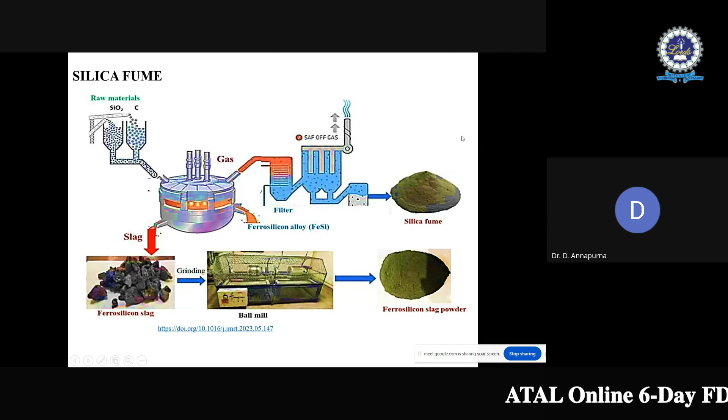So that is how silica fume is generated, because it is subjected to a huge amount of temperature, and it will be ground to a fine powdered form. The particle size will be very, very small compared to all the other pozzolanic materials. It is very rich in silica. The silica content of the silica fume will be very high.

And the next one will be agro-based material. This is rice husk ash from the rice plant. When the separation of rice husk and rice is done, this rice husk first should be washed thoroughly. Then the dry rice husk should be kept in an oven at a temperature of 150 degrees Celsius. So it will be dried, and this rice husk will be burned at a temperature of 600 to 800 degrees Celsius. Then the ash will be cooled and again ground to get the fine powdered form of this ash, which is called rice husk ash. It is also rich in silica content, and the fineness will be very high.

And then the next agro-based material is sugarcane bagasse ash. In recent years, much research has progressed in this particular area, after identifying the silica content and alumina content in this bagasse ash. So from the sugarcane industries, when the bagasse is produced, that bagasse will be burned to get a fine powdered form. That is called sugarcane bagasse ash. Given its rich silica and alumina content, it can be used as source material in the production of geopolymer concrete.

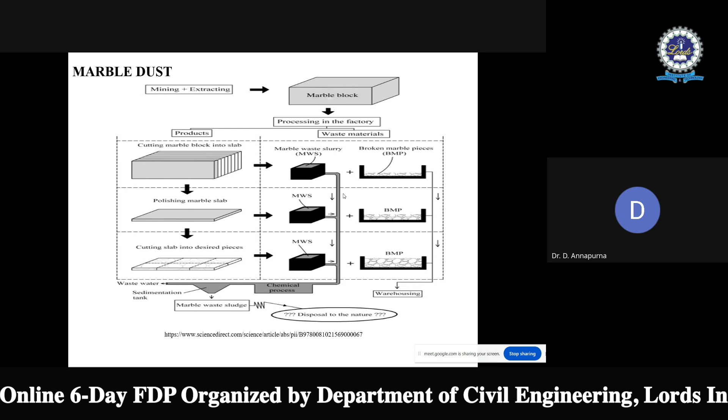Then comes the marble dust. In the marble industry, this marble dust is produced as a byproduct during the marble processing stage, cutting stage, polishing stage, and cutting slabs into desired pieces. In all the stages, the marble will be formed into this small powdered form. This powder can represent around 25% of the original marble block, so that much wastage is produced from the marble industries. This marble dust is a rich source of calcium oxide, so it can be used as an admixture to geopolymer concrete.

Then the red mud. This red mud is a waste product created during the extraction of alumina from bauxite. In the bauxite industries, this red mud is produced from the Bayer process. It is also rich in alumina and silica, so it can be used as source material.

Then the next one will be the palm oil fuel ash. It is also an agro-based material. Palm oil fuel ash is generated by the combustion of agricultural residues like palm fibers and palm kernel shells in biomass thermal power stations. From that, we get this palm oil fuel ash. It is also rich in silica and alumina, so it has the potential to be used as source material in the production of geopolymer concrete.

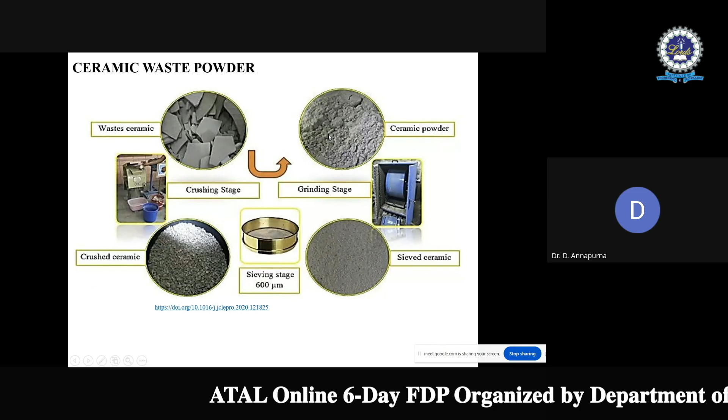Then ceramic waste powder. From the ceramic industries, the ceramic waste is collected, crushed into small pieces, then ground to get the fine powdered form, and in between it is sieved to get the desired size. It is rich in silica and alumina, so it can be used as the best source material in the production of geopolymer concrete.

Waste glass powder. The waste glass powder production process typically involves collecting the waste glass, sorting it to remove contaminants, crushing it into small pieces, then washing to further clean it, and finally grinding and sieving it to get the glass powder form. It is rich in silica and alumina, so it can be added as a source material in the production of geopolymer concrete.

Then the paper sludge ash. It is a best source of calcium oxide; rich calcium oxide will be there from the paper sludge. In the paper industries, the raw paper sludge is collected from the sludge tank, then the sludge is dewatered and sun-dried for 5 to 6 hours. Then it is incinerated in the muffle furnace for 2 hours at different temperatures, and further it will be sieved to get the paper sludge ash. It is rich in calcium, silica, and alumina, so it can be used as a source material and also as an admixture to geopolymer concrete.

Then the next one will be the sewage sludge ash. Sewage sludge ash is a waste material created when dewatered sewage sludge is burned in an incinerator.

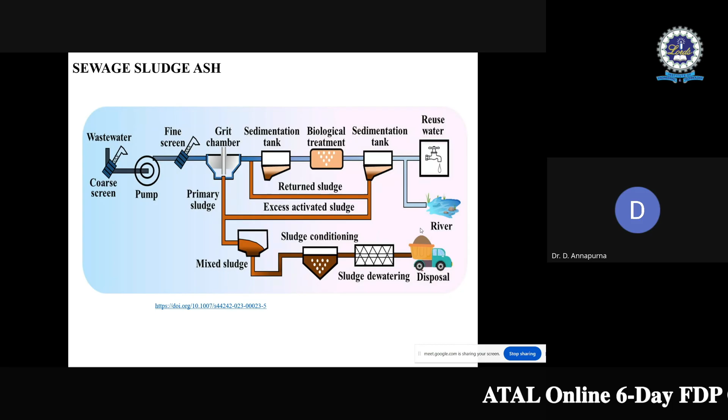This is also rich in silica and alumina. Recently in our college, this sewage sludge ash was collected in Hyderabad. One waste-to-energy plant was created in Jawahar Nagar by GHMC. The outcome, that is the waste product from that, is incinerated bottom ash. That bottom ash was collected, and when XRF and XRD studies were conducted on that incinerated bottom ash, it was identified that it is rich in silica and alumina.

So this sewage sludge ash also can be used; if the contaminants are controlled, then it can be used perfectly as a source material in the production of geopolymer concrete. Then the wollastonite. When the natural ore, the limestone and the dolomite, undergoes high temperature and pressure conditions, often in the presence of silica-bearing material, it leads to a metamorphic process and it will be converted, and that will be ground into fine powder to get this wollastonite. It is also a rich source of calcium oxide.

So if we see the list, all the materials are either rich in silica and alumina or rich in calcium oxide along with a certain amount of silica and alumina. These materials can be used individually to prepare geopolymer concrete or in suitable combinations to get a sustainable geopolymer concrete. So there is a possibility of conducting research in geopolymer concrete with the help of these alternative materials.

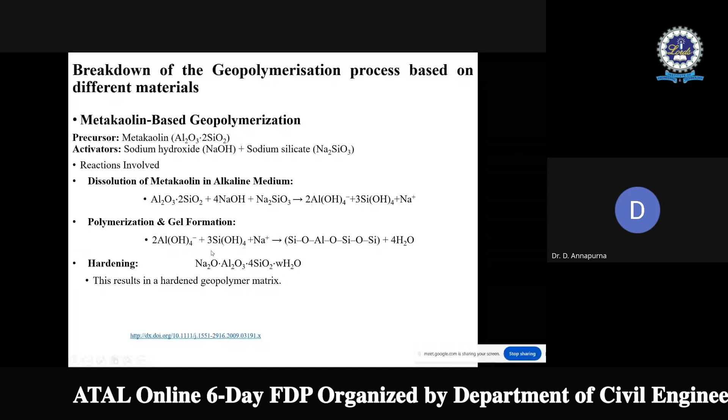With this introduction to geopolymer chemistry and source materials, now I am going to discuss one research conducted in our college. Before that, let us quickly look at the breakdown of the geopolymerization process, that is metakaolin-based geopolymerization. I just discussed dissolution of the material, polymerization, gel formation, hardening, and how it occurs. First the dissolution of the metakaolin in alkaline medium occurs. Then immediately oligomerization, polymerization and gel formation occur. Then the hardening process. When it is hardened, it gives a geopolymer matrix in the form of N-A-S-H.

It is common for metakaolin, fly ash, rice husk ash or volcanic ash, sugarcane bagasse, because all are rich in silica and alumina. When it comes to GGBS, ground granulated blast furnace slag has a high amount of calcium oxide, and silica and alumina are also there. So there will be a slight change in the chemistry of the geopolymerization process. So what are the reactions involved? First, dissolution of slag compounds. It is rich in calcium and silica, so calcium and silica will be dissolved and converted into hydroxide, silica hydroxide form.

Then comes the polymerization. In the earlier case, it gives N-A-S-H, sodium aluminate silicate hydrate gel. But here it is rich in calcium, so it will give calcium silicate hydrate first. Then that calcium silicate hydrate will form calcium aluminate silicate hydrate, because it is equally rich in aluminate. The very important aspect of this slag-based geopolymerization process is the setting of geopolymer concrete. When GGBS is added, it sets very fast compared to fly ash geopolymers.

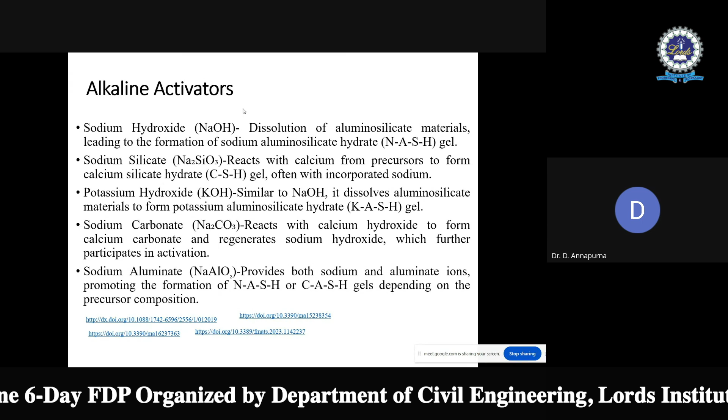So now the research is open to conduct using sodium carbonate based alkaline activators, or sodium aluminate based activators, or magnesia. It can be conducted. So this is about the alkaline activators.

Then after discussing source materials and the different possibilities of using them, the next one is alkaline activators. Then we will move towards one case study, which is an experimental study conducted in our college.

It is strength and durability properties of fly ash and GGBS based geopolymer concrete. This research work is a comprehensive investigation to arrive at the mix proportioning and performance of GPC, both in terms of mechanical and durability properties, because there is no Indian Standard Code or any other code specifying the mix design for geopolymer concrete.

At the same time, we cannot even make use of IS 10262 because the materials used in geopolymer concrete are completely different, and it depends on several aspects. That is the reason the first objective of this case study is to arrive at the mix proportioning and give grading to the geopolymer concrete.

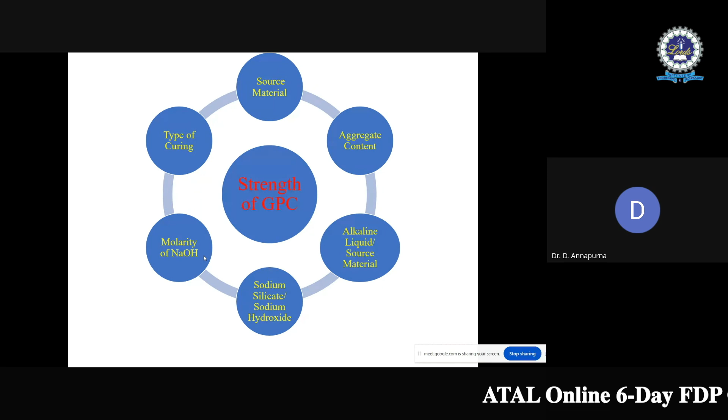When the literature is searched to see what different parameters influence the strength of geopolymer concrete, it is identified that source material is going to influence the strength of geopolymer concrete. Then the aggregate content - if the aggregate content varies, the strength of geopolymer concrete is going to differ.

Then the alkaline liquid to source material ratio is also going to influence the strength of geopolymer concrete. Then the type of alkaline activator - the ratio between sodium silicate and sodium hydroxide - is also going to influence the geopolymer concrete strength. Then molarity, because concentration of sodium hydroxide plays a very important role; if the concentration is decided based on molarity, then molarity also plays an important role. Then the type of curing - heat curing was used by different researchers.

So heat curing or ambient curing based on that. These are the 6 parameters considered to get the optimum mixture proportions of geopolymer concrete.

After getting the optimum mixture proportions, the strength properties are identified, like compressive strength, flexural strength, split tensile strength, Young's modulus, and Poisson's ratio as per the standards. Then the durability of concrete.

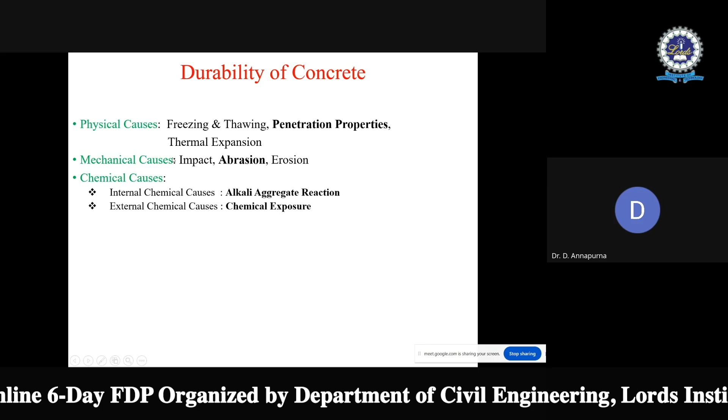Durability of concrete actually depends upon different causes like physical cause, mechanical cause, chemical cause. Under the physical causes, freezing and thawing action, penetration properties, thermal expansion, all influence the durability properties of concrete. Then under the mechanical causes, impact, abrasion, erosion, these properties influence the durability.

Then the chemical causes. In the chemical causes also, internal chemical cause will be there, external chemical cause will be there. Internal chemical cause like alkali aggregate reaction, alkali carbonate reaction, all these reactions cause changes in the internal core of concrete. Then the external chemical cause, chemical exposures.

External exposure, whenever the concrete is submerged or inserted under different mediums, let us say acid exposure, sulfate exposure, etc., how it is going to influence or change the properties of concrete. So this is what is considered.

In this particular study, all the penetration properties are identified. Under the mechanical cause, abrasion test is conducted on the geopolymer concrete. Then alkali aggregate reaction test is conducted. Then the chemical exposures like sodium, sulfate, acid, and chloride exposures are conducted on the proposed geopolymer concrete.

The materials used here are fly ash, GGBS, then sodium hydroxide and sodium silicate solution. The first stage will be the parametric studies.

The importance of these parametric studies is to identify the optimum mixture proportions to give grading to the geopolymer concrete. First, as no code exists to conduct mix design of geopolymer concrete, the mixture proportions of geopolymer concrete were considered based on the guidelines given by Rangan.

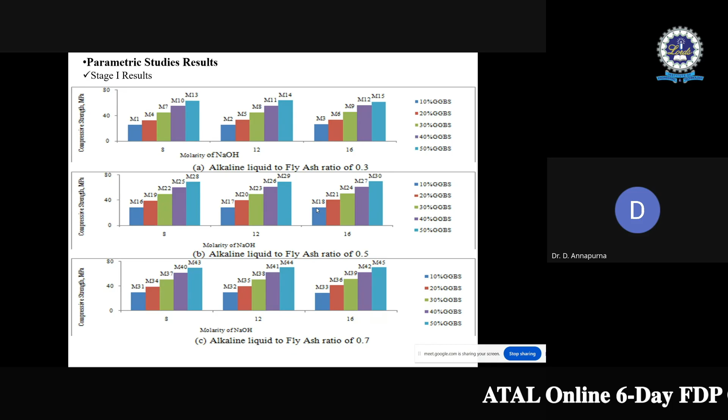When we check the alkaline liquid to fly ash ratio of 0.7, this mix consists of more alkaline liquid compared with the other ratios. The nature of alkaline liquid is too cohesive, so when too cohesive liquid is in the mix, it gives better workability, but it is very difficult to handle because of this higher amount of alkaline liquid. So this ratio of 0.7 was not considered. Now the ratio of 0.5 gives moderate workability and does not consume much superplasticizer either.

So from these stage 1 results, it is maintained: molarity of NaOH is maintained as 8, alkaline liquid to fly ash ratio is maintained as 0.5. At the same time, checking each set, as the GGBS dosage is increasing, let us say 10 to 50%, almost the compressive strength increment is observed by 150%.

That much tremendous increase in compressive strength is observed with the addition of GGBS, because along with sodium aluminate silicate hydrate gel, it also gives calcium silicate aluminate hydrate gel, so that is the reason it gives a huge amount of compressive strength. Keeping that in view, for the next stage of investigation, GGBS dosage is maintained as the variation only, because it is giving improvement in strength.

In the first stage, total aggregate content was maintained constant at 70%. Now we want to check the influence of variation of total aggregate on compressive strength, so it is taken as a variation of 70, 74, and 78%. Again, ambient curing conditions are only considered in the geopolymer concrete.

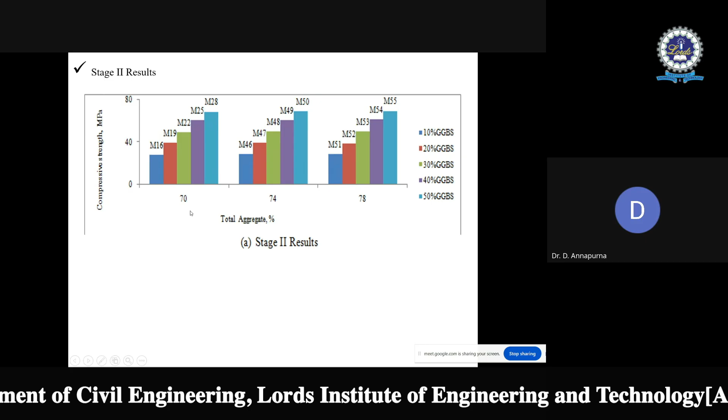Okay, that is a binder content. In the geopolymerization process, the binder plays a very important role. So that is the reason to improve the binder content; 70% of aggregate content only is maintained for the next stage of work. That is the third stage.

So in the third stage, 70% of total aggregate is maintained. From the second stage, molarity and alkaline liquid to fly ash ratios are already maintained constant. Then the percentage GGBS is improving the compressive strength, so again the same variation is considered. Then comes the curing, because in the earlier stages only ambient curing was considered, and the effect of curing was not considered. So here, both types of curing conditions are considered, that is heat curing and ambient curing.

But at the same time, it is seen that when the GGBS dosage is increased, the difference between the ambient curing and heat curing is reduced. So almost the same amount of compressive strength is observed between the ambient curing samples and heat curing samples. The reason may be the resulting hydration due to increased calcium content; because the GGBS addition is more, calcium content is more, and due to that the hydration process is evolving. So in the ambient curing also, because of that hydration process, it is giving good improvement in the compressive strength.

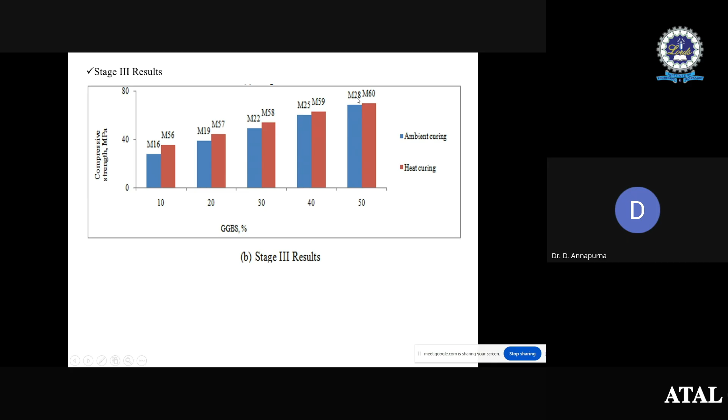So at higher dosages of GGBS, there is very little difference between the heat curing and ambient curing samples. And keeping in view practicality, only ambient curing is considered for the next stage of work. So in the fourth stage, we got total aggregate content as 70%, molarity 8, alkaline liquid to fly ash ratio as 0.5. Then ambient curing conditions are considered, then the variation of GGBS, because from 10 to 50% it has shown a good improvement in the compressive strength.

That is the reason now only the GGBS dosage, how it is going to improve the compressive strength, is seen by decreasing the interval to 5. That is 5%, 10%, 15, 20, 25 like that. Based on this, it is observed that as the percentage replacement of fly ash with GGBS is increased from 5 to 50%, the compressive strength increased from around 30 MPa to 70 MPa. So this 30 MPa is meeting the target strength of around, let us say, M20 grade concrete, and the last one is meeting around M60 grade concrete.

So based on this, the optimum mixture proportions are arrived at in such a way that the compressive strength of all GPC mixtures under investigation attained the target strengths specified from M20 to M60 grades. To differentiate between the normal conventional grade concrete and geopolymer mix, the designation given here is GM20, GM30. G stands for geopolymer and M stands for mixture. Geopolymer mixture of 20 MPa strength is specified as GM20. So for all the mixtures, the optimum proportions are identified. This will be the first stage of work.

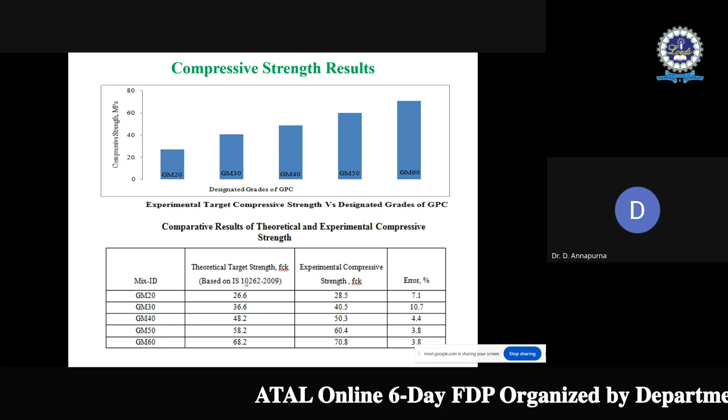Then in the second stage, all the mechanical properties are identified, like compressive strength, flexural, tensile strength. All the mechanical properties of this geopolymer concrete are meeting the level of conventional concrete of the same grade, M20 to M60. The theoretical modulus of elasticity, done as per the Indian standard IS 456, is compared with the experimental modulus, and the percentage error is within 15%. So it is giving a good comparison, meeting the level of conventional concrete. All the proposed grades of geopolymer concrete are showing the same level of mechanical properties as the conventional grade. This is about the mechanical properties.

Immediately after the mechanical properties, these mixtures were taken for scanning electron microscopic observation. So next, SEM pictures, scanning electron microscopic pictures. Using this scanning electron microscope, the study was conducted on the proposed grades of geopolymer mixtures. At the same time, the chemical analysis was done using EDAX peaks, which is shown.

First one is fly ash based geopolymer concrete. To see how the geopolymerization process is varied in terms of microscopic observation, first we tried with fly ash based geopolymer concrete. That means only fly ash is used in the production of geopolymer concrete. In that, a 28 days cured sample is taken. So in this, this is reacted fly ash; this cenospherical shape is depicting the fly ash. On the top of that, geopolymer product is there, and these are non-reacted fly ash.

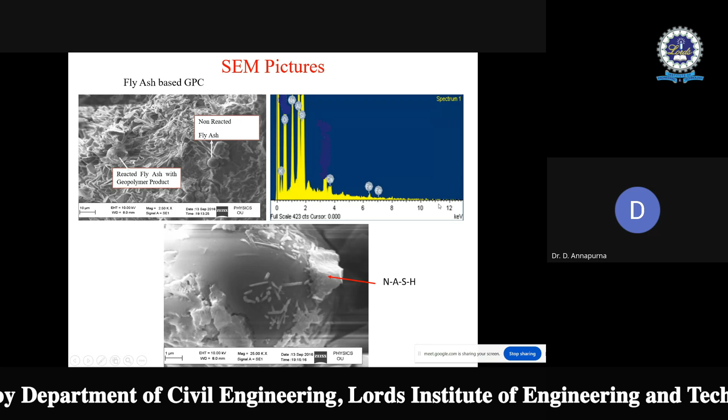In 28 days fly ash based geopolymer concrete, more fly ash particles are seen without reaction products. And this is sodium aluminate silicate hydrate gel, which is confirmed through EDAX peaks. Because in the EDAX peaks, chemical composition percentage weights are taken into consideration, where the silica by alumina ratio is coming in between 1.5 to 2, confirming the presence of NASH gel.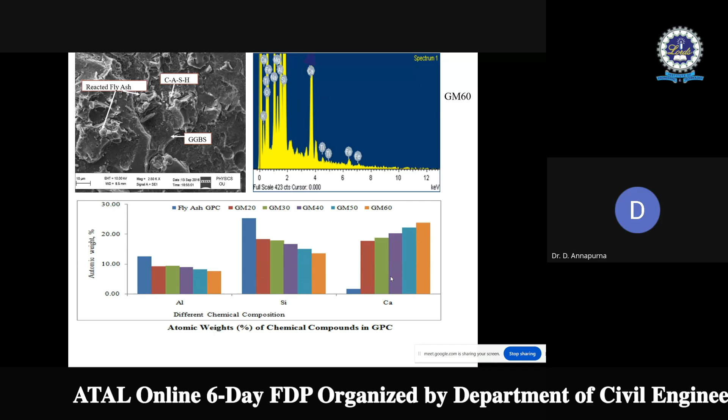Increasing the calcium content through the addition of GGBS causes a more compact and finer microstructure, as observed here, because calcium is acting as a seeding or precipitating element. So the addition of GGBS is improving the microstructure, making geopolymer concrete compact. At the same time, it is improving the setting action. So the compressive strength of geopolymer concrete is increased with the addition of GGBS.

Then durability properties are identified, like water absorption test, sorptivity test, permeability and penetration characteristics. Then chemical resistance: sulfate resistance test, acid resistance test, and RCPT, rapid chloride penetration test, with respective codes specified here. Alkali silica reaction test is conducted as per two codes: the Indian standard mortar bar test and the ASTM accelerated mortar bar test. Abrasion test, underwater method, is conducted as per ASTM standards. Then comes the durability results, water absorption results.

Overall, if you look at the results of water absorption, the geopolymer concrete of 20 grade and the conventional concrete of 20 grade are showing little difference between the water absorption capacities. But as the GGBS is increased, that means higher grades of geopolymer concrete, GM60, it is having almost similar water absorption characteristics because of improvement in the compact crystalline nature with the addition of GGBS.

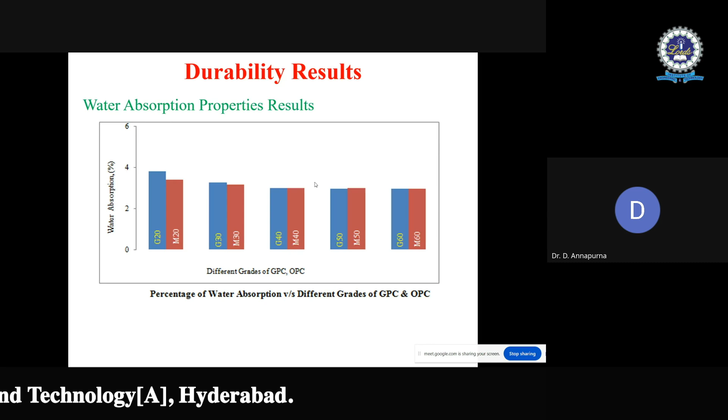Overall, the water absorption is less than 5%. So we can conclude that it is having low water absorption, which is according to VicRoads standard specifications. Then the sorptivity test. Sorptivity test is conducted as per the ASTM standards. Here the initial sorption is conducted for the first 6 hours.

Then the final sorption. Final sorption and initial sorption intersection is considered. Final sorption, as per the code, should be conducted up to 7 days. Then you will get the final sorption value. Then, with the theoretical equation specified by the code, the sorptivity value will be achieved. So here it is mentioned that if the sorptivity index of geopolymer concrete is less than 0.2 mm per square root minute, it is considered to be acceptable quality in terms of water tightness.

As per the earlier literature, it is specified that the sorptivity index should be less than 0.2 per square root minute, and if you look at it, it is less than 0.2 only. So it is within the acceptable limit in terms of water tightness. So the proposed geopolymer concrete has a water tight nature.

Then the coefficient of permeability. The permeability test is conducted on the geopolymer concrete and the conventional concrete of the same grades. It is seen that as the grade increases, the coefficient of permeability of both is almost the same. It is depicting the same as the water absorption characteristics. So we can say that the penetration characteristics of geopolymer concrete and conventional concrete are almost the same. It is behaving in a similar way.

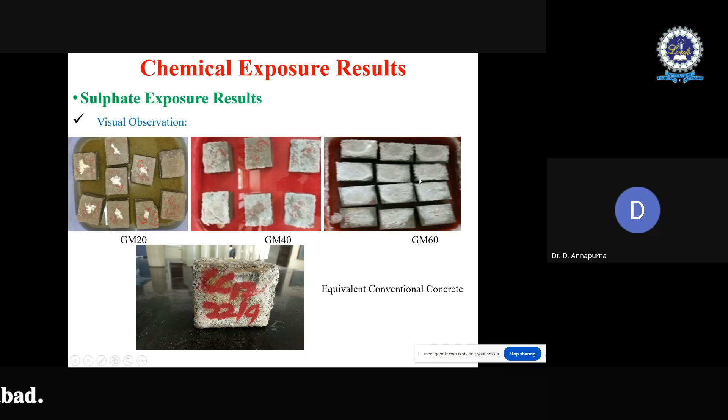If you look at these GM60 samples, the surface is almost free of white patches after 56 days of exposure, with little surface degradation. Surface degradation is not seen clearly. But in ordinary Portland cement concrete, significant white patch formation along with surface degradation is seen. So geopolymer concrete is showing superior behavior compared to the conventional concrete when exposed to magnesium sulfate. Then the change in weight and the loss in strength are also considered.

In the loss in strength, it is observed that loss in strength increases with increase in grade of concrete. Surprisingly, as the grade of concrete increases, the loss in strength is increased when exposed to sodium sulfate and magnesium sulfate. The probable reason for this behavior may be attributed to the higher calcium content reacting with sulfates, because the GGBS dosage, which has calcium content, is increased. That calcium reacts with the sulfates and degradation of the material occurs. Because of that, loss in strength is increased.

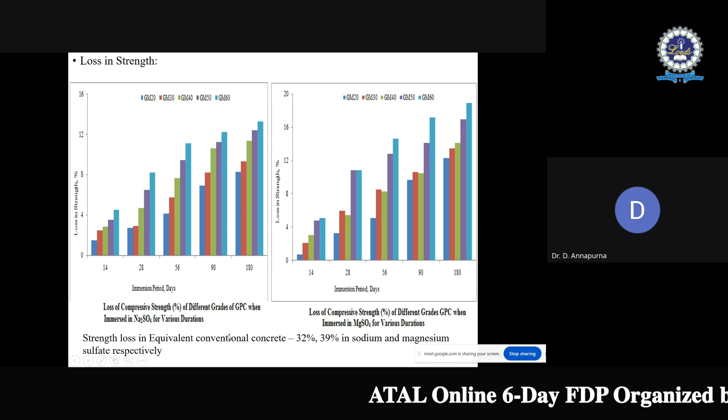But when we look at the conventional concrete, the percentage loss in strength is as high as 32 to 39%, whereas here it is 13% to around 18%. So even though additional calcium in the form of GGBS is added in the geopolymer concrete and the calcium is reacting with sulfates, its resistance against sulfate will be very high compared to the conventional concrete. That is what we can conclude through this particular study.

The next one will be the sulfate expansion test. Along with the percentage loss in weight and strength, the sulfate expansion test is also conducted using mortar bars. The result depicts a similar kind of behavior. If you look, the OPC mortar bar is showing a large amount of white patches. Normally, whenever sulfate attacks concrete, the physical observation will be the formation of white patches. White patch is nothing but ettringite, right? Ettringite formation is very high compared to geopolymer products.

Percentage elongation is also increasing from 0.031 to 0.15%. The maximum amount of increase is seen when the samples are immersed in magnesium sulfate. But when compared with the ordinary Portland cement based mortar, higher expansions are seen, 0.28% and 0.41%. So again we can say there is better resistance capability of the proposed geopolymer concrete in the sulfate solution compared with the ordinary Portland cement mortar bars.

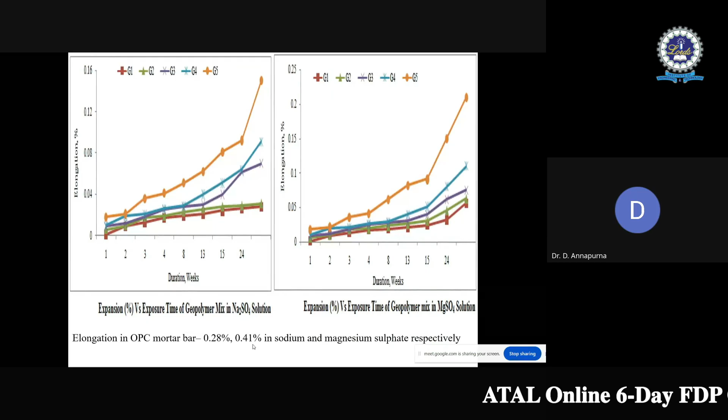It is seen from the earlier slides that as GGBS is increased in the production of geopolymer concrete, calcium aluminate silicate hydrate gel is propagated in geopolymer, right? If we look at the same kind of phenomenon, these calcium rich materials are reacting with the sulfates and influencing the calcium silicate hydrate gel. So that can be seen through this calcium by silicate ratio.

If we look at the grades GM20 to GM60, the calcium by silicate ratio is increasing. But the calcium by silicate ratios for the conventional concrete are increased by 26% and 30% respectively in sodium sulfate and magnesium sulfate solutions. So that is the reason we can say that all designated geopolymer concrete specimens show better resistance to sulfate compared to the normal concrete.

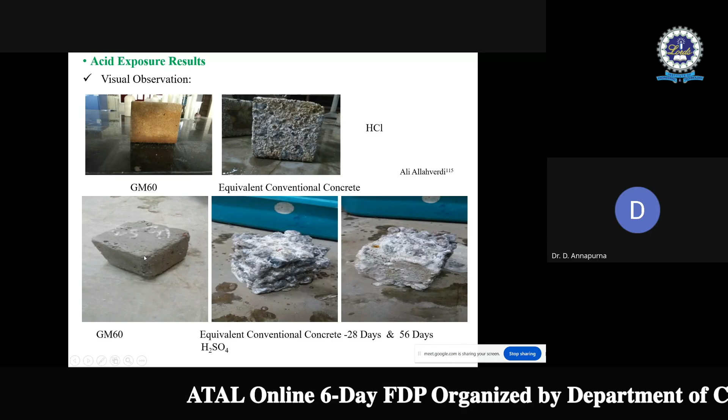Normally, in the literature, whenever concrete is exposed to acid, the basic phenomenon will be removal of mortar and aggregate exposure, especially with sulfuric acid. So here, in the GM60 sample, a little surface degradation occurred, but nowhere can we see removal of mortar and aggregate exposure. This specimen is after immersing GM60 in H2SO4 solution for 180 days.

But how sulfuric acid is affecting the equivalent conventional concrete is seen through these pics when it is immersed in solution for 28 days and 56 days. After 56 days, more degradation of the sample occurred, more softening of material. It is not possible even to handle that concrete. That is the reason the samples were taken out after 56 days. The 180-day test is not conducted.

So with this we can clearly say that the proposed grades of geopolymer concrete are showing superior resistance against sulfuric acid compared with the conventional concrete. Because after 180 days also aggregate exposure is not seen, but for the conventional concrete, the specimens were taken out from the solution after only 56 days.

The same is confirmed through loss in weight and loss in compressive strength. As the grade of geopolymer concrete increases, loss in strength is increased, up to 18% for HCl solution immersion and up to 28% for sulfuric acid solution, after 180 days. But conventional concrete immersed in HCl solution shows a 50% reduction in compressive strength, and after only 56 days, a 79% reduction occurred. So it again confirms the superior behavior. The same is seen through the SEM pics.

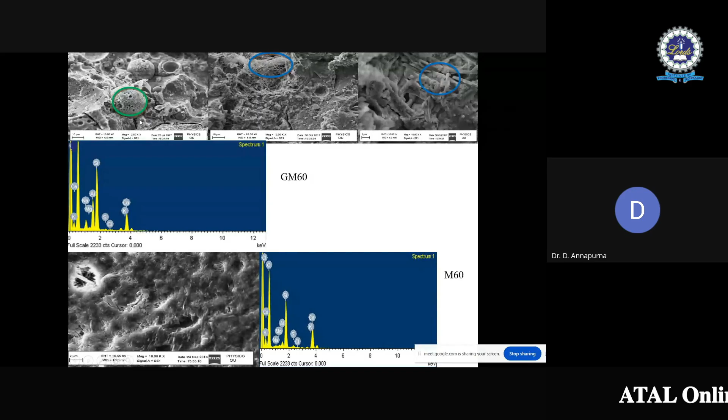In GM60, decomposition of the geopolymer product is seen on the top of fly ash particles. If we look, the decomposition of this geopolymer product is visualized. At the same time, in some parts, formation of ettringite and formation of gypsum can be seen. And in the case of normal, conventional concrete, the complete decomposition of calcium silicate hydrate is seen through the sulfate

concentrations. The same is depicted again through the atomic percentage weight of the samples. As the grade of geopolymer concrete increases, sulfur content also increases. That means the effect of sulfuric acid is more on the GM60 samples than the GM20 samples. So this is about acid exposure.

After the acid exposure, the RCPT, that is the rapid chloride penetration test, is conducted on the proposed grades of geopolymer concrete. Here, the GM20 sample has only 10% of GGBS. Because it has only 10% of GGBS, its reaction rate will be very slow, and after 28 days it will not get its full strength. Keeping that in view, both the 28-day samples and 90-day samples are taken out for the RCPT test, and the test is conducted.

From these results, it can be observed that chloride permeability decreases as the curing age and the grade of GPC increase. As the curing age increases, the chloride permeation decreases, and as the grade increases, chloride permeation also decreases. When compared with normal concrete, a similar kind of behavior is observed between the geopolymer concrete

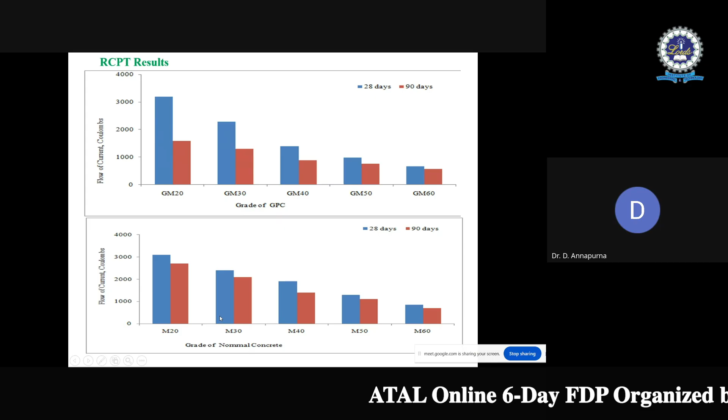and normal concretes. Based on the ASTM C1202 guidelines, the chloride ion permeability of GM20 and GM30 is classified as low. The 40, 50 and 60 grades of geopolymer concrete are classified as very low. Whereas in normal concrete, M20 and M30 grades are classified as moderate, 40 and 50 as low, and 60 as very low. So almost similar behavior is observed in the chloride ion permeation rate.

The next test conducted is the alkali silica reaction. The main aim is that whenever geopolymer concrete needs to be prepared using locally available materials which are rich in silica content, it may promote the alkali silica reaction in the geopolymer concrete. To check how much resistance it gives against alkali silica reaction, this test is conducted. First, the mortar bar test is conducted as per the Indian standards.

To check the alkali silica reaction, the type of aggregate considered here is quartzite. Quartzite aggregate, which has reactive silica, is added in the preparation of geopolymer mortar. To prepare the geopolymer mortar, 10% of GGBS is added to 90% of fly ash, up to 50% of GGBS and 50% of fly ash. The same compositions are considered to prepare the mortar bars. Percentage elongations are calculated after 12 months, meaning the test is conducted up to 1 year.

As per the IS 2386 Part 7 code, if the 6-month elongation is within 0.06%, then the material can be stated as not reactive. Even if it is added with reactive aggregates, alkali silica reaction will not occur. Otherwise, it is potentially deleterious, as per the standard. And as per ASTM standards, the 12-month elongation should be within 0.04%.

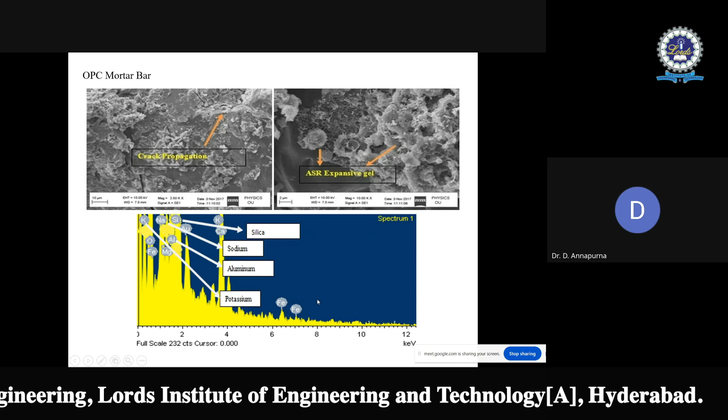In the chemical compositions, higher traces of silica, sodium, accumulation of potassium, aluminum, sodium silicate confirm the presence of alkali silica reaction expansive gel. So this is about the alkali silica reaction.

Then the last test conducted is the abrasion resistance test. It is an underwater method to simulate field conditions, especially in hydraulic structures where small silt and particles attack the concrete surface causing abrasion. To simulate these conditions, this particular test is conducted as per ASTM standards.

As per this test, it is clearly seen that as the grade of geopolymer concrete increases, the average depth of abrasion decreases. The same phenomenon is seen in conventional concrete, and it can be clearly seen through these pics.

This is the M20 sample subjected to abrasion. When conducted for the abrasion test, we can clearly see the aggregate exposure because of the depth of wear, so the aggregate is exposed. In case of the M60 sample, only slight aggregate components are visible.

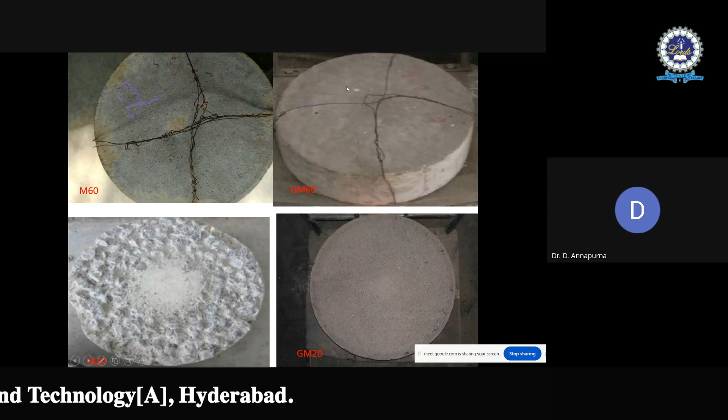And between GM20 and GM60, GM60 shows still more superior behavior compared to GM20 because of its high strength.

In conclusion, we can say that all the proposed grades of geopolymer concrete perform superior to conventional concrete of the same grades in terms of strength and durability. Hence geopolymer concrete has potential to replace conventional concrete in the near future.

One more case study I thought of explaining. I'll just quickly show you this, because this research paper is still under review, so I cannot tell you all the results or discuss them here. In this particular work, we tried to prepare one cement, that is alkali activated cement.

In the earlier work, the concrete was prepared. Here, the cement is prepared, that is a dry powdered form of alkali activated cement. The source materials used here are fly ash and GGBS. To prepare the alkali activated cement, alkaline activators are varied, like sodium hydroxide, magnesium oxide, sodium carbonate, and sodium silicate.

Different combinations of materials were taken, like this, for the complete work. As this cement needs to be prepared, these materials are mixed in dry form and grinded to a fine powdered form. For the grinding process, steel ball milling is used at NCCBM.

This work is conducted in different stages, stage 1 to stage 4, and on the prepared geopolymer cement or alkali activated cement, different tests are conducted as per IS 4031. After conducting these physical tests, chemical tests are conducted, like X-ray diffraction, XRD, XRF. Then scanning electron microscopy pics are taken and evaluated. Particle size distribution is also done, that is granulometric investigation. All these investigations are conducted on this particular material.

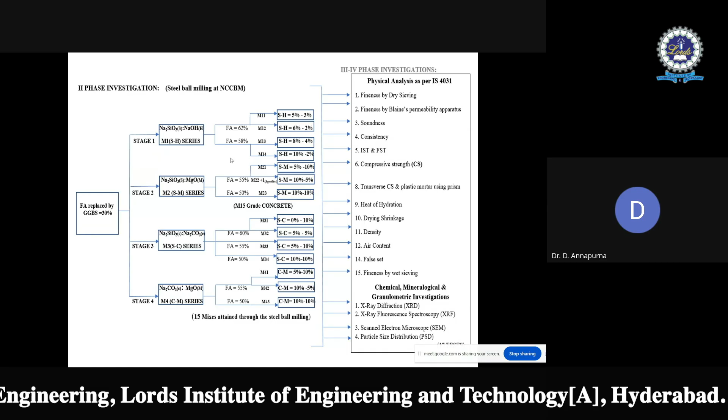The major finding is that all the properties of this geopolymer cement are similar to ordinary cement, but we got the grade up to 33 grade only. We didn't get 43, we got only up to 33 grade, as it is in the initial stage. This has given encouragement to progress towards getting geopolymer cement or alkali activated cement of 43 grade, and even in the near future, we may get 53 grade geopolymer cement or alkali activated cement also.

In that particular country, fly ash is not available, volcanic ash is available. So we brought that particular material from that country, volcanic ash. In different combinations, like combination with rice husk ash, silica fume, fly ash, GGBS is combined and the work is done. This is volcanic ash, and these are other source materials.

These are the properties of volcanic ash. If you look at the calcium oxide and silica, it is rich in silica. Calcium oxide is up to 10% only. It is having alumina oxide of 15%. So it is having similar properties as that of fly ash. This is considered as the base material.

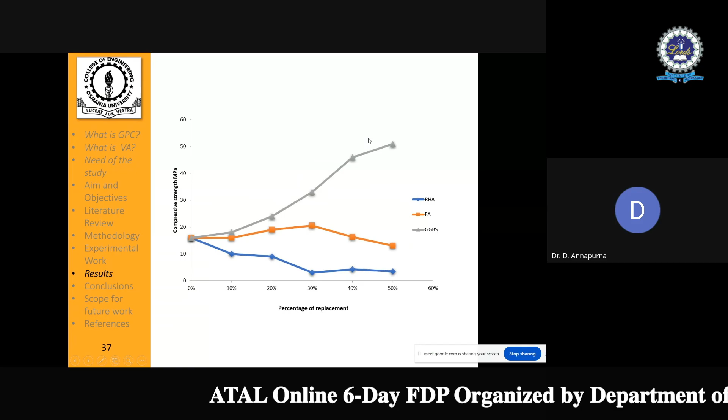We are trying to get volcanic ash based geopolymer concrete with all these additives like GGBS, fly ash, silica fume, rice husk ash. Out of this, we identified that GGBS, when added as partial replacement with volcanic ash, gives the highest improvement in strength. Then behind this will be the calcium content. Calcium content is improving the strength property of geopolymer concrete.

Final conclusion of the study is the microstructure of optimum strength of geopolymer. Overall conclusions, I'll just tell you. Many more binder combinations can be tried as precursors to make geopolymer concrete more sustainable.

As we discussed, fly ash and GGBS combination, like that, it can be tried with sugarcane bagasse combination, and other calcium-rich materials, so that we can get geopolymer concrete which is cost-effective and also sustainable. Precursor combinations can be selected based on silica, alumina, and calcium contents in the materials to get improvement in strength and fast setting action.

Alternative alkali activators can be tried to reduce the toxic nature of alkali solution. Sodium hydroxide was used widely in the preparation of geopolymer concrete, but it is too toxic and it is very costly material. To get economical and environmental friendly geopolymer concrete, we can try other alkali activators.

With the correct selection of material combinations, GPC, geopolymer concrete, can emerge as a competitive alternative to traditional cement concrete, even in case of in-situ concrete. That means in site-prepared concrete also, we can make use of geopolymer concrete on par with the traditional cement concrete. So these are the references.